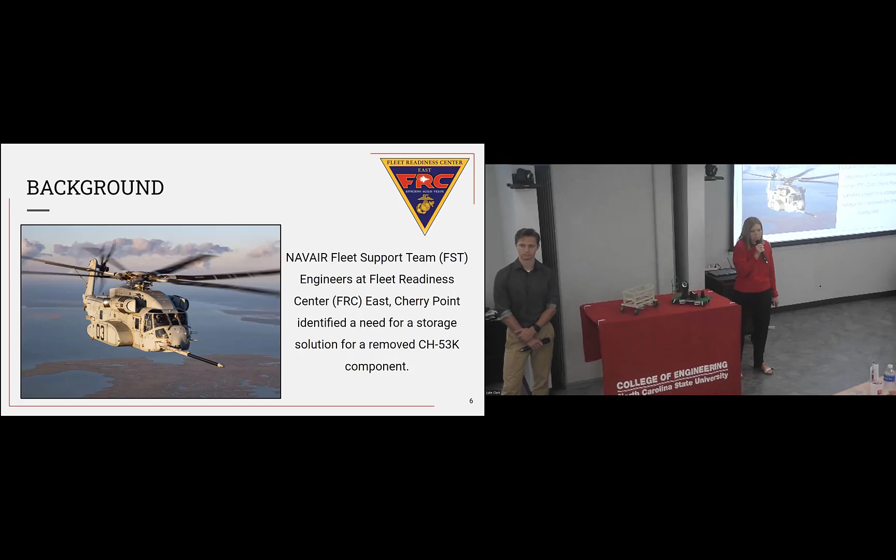If you have any questions or comments, we'll have time at the end to hold an open conversation about that. So jumping in, pictured here is the CH-53K helicopter, which is used by the Marines. And over at FRC East, they have a fleet support team known as the FST, and they support this aircraft and its Marines to keep it up in the air and supporting the mission. Essentially, the engineers from the FST came to us and briefed us with an initial problem, and that was that they had identified a need for a storage solution for a component that comes off of this helicopter.

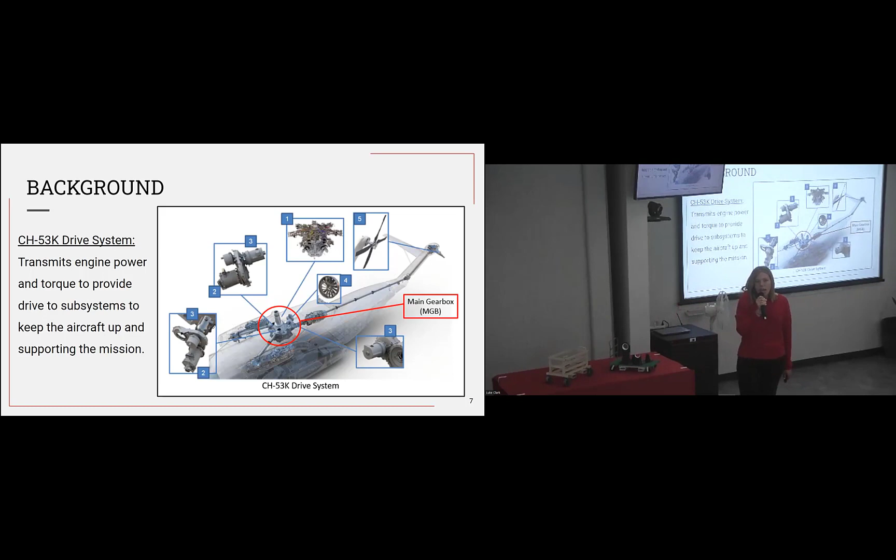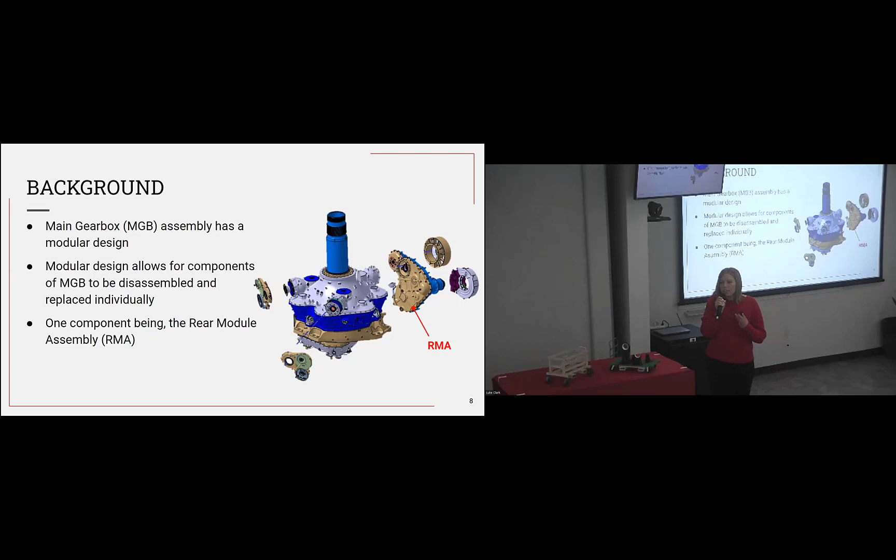Some more background for you. This is an internal view of that 53K and its drive system. Circled in the middle is the main gearbox, and it transmits engine power and torque to several of the subsystems that you see here. And here is a bigger picture of that for you. Sikorsky, who is the original manufacturer of this aircraft, designed this gearbox to be a modular design. With that being said, you can individually disassemble and replace components as necessary. One of those components that can come off individually is known as the rear module assembly, and today you will hear that called the RMA. And that is the component that the FST reached out to us about creating a storage solution for.

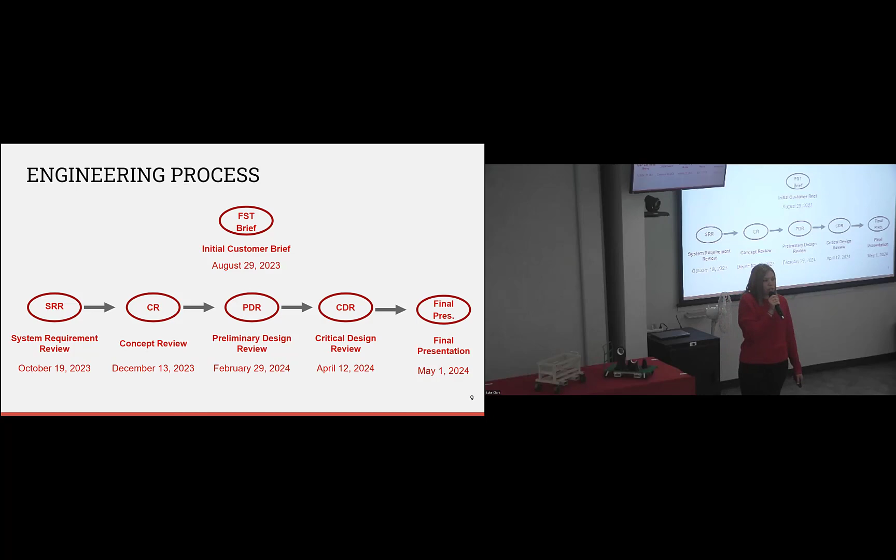So I just gave you a crash course of what we were given by the FST. And upon receiving that information, we began to step through the engineering design process that we've been learning here at the MES program. So we stepped through evaluating the problem, setting some requirements, and moved on to conceptual design, moving on to preliminary design, and arrived at our critical design review where we received engineering approval on our final design. And that final design is what you will be seeing here today. So with that, I'm going to turn it over to Thane, and he's going to finish providing you with details of how we step through this engineering design process.

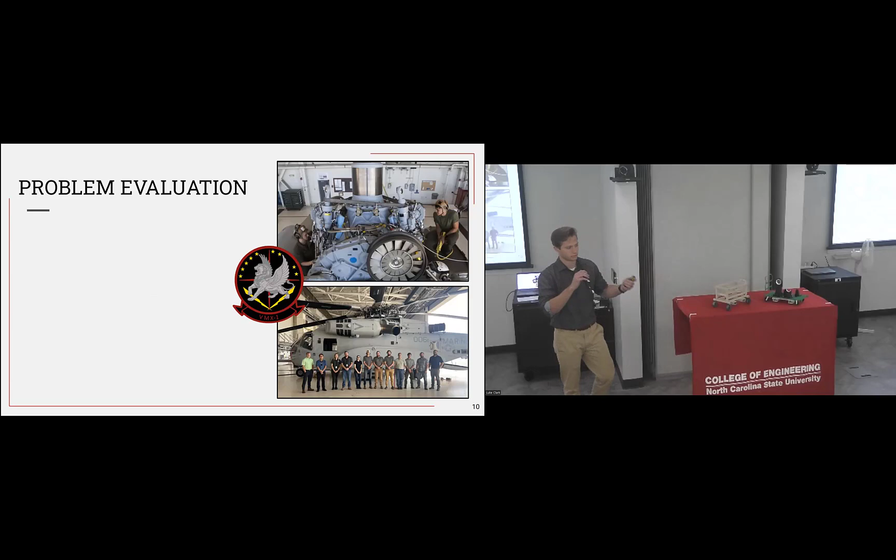Thanks, Savannah. So problem evaluation in engineering is one of the most important parts of the solution process, because if we don't correctly understand a problem, then we're not going to have the most effective solution. So what we try to do here and what we're taught to do here in Havelock is to understand the problem and understand what the problem really is before we jump into how to solve it. So in effort to do that, we were able to visit a squadron down in New River, and we were able to get a look at what the problem is, everything surrounding the problem, the maintainers who would be dealing directly with this problem and who would be affected by our solution.

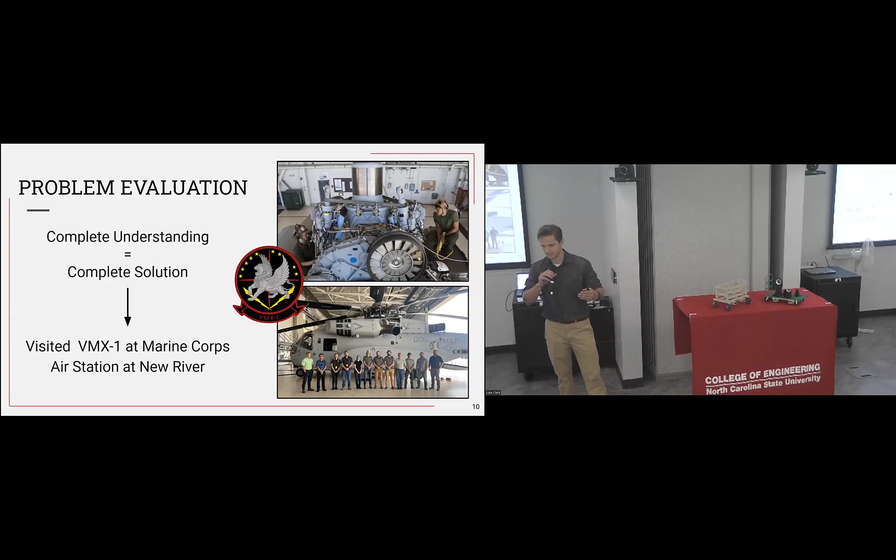So during our visit there, we were able to get a look at this component while it was on the aircraft, and we were able to see that when the RMA is removed from the aircraft, it's done for a couple of reasons, maintenance being one. It reaches certain cycles and it needs to get taken off for repairs or checks. So when that happens, in order to not down the aircraft, they ship a new one in, and they take the old one off and they replace them and keep going. But there's a slight flaw in this process where when the new one comes in, it's in its shipping container. And when they have to pull the old one off, there's nowhere to put the old one. So they do the best they can. They put it at the best place in the hangar, and they replace them.

So the problem really was that this old RMA that needed to get repaired had no place to go and wasn't being protected or in a good, safe spot, so that it wouldn't get damaged or corroded or anything. So with that understanding, we were able to really dig into this problem and better evaluate it than if we didn't go down there and talk to the people who were using it. So we were able to get a list of functions from the maintainers as well as the engineers that would be like the haves and necessities for our solution.

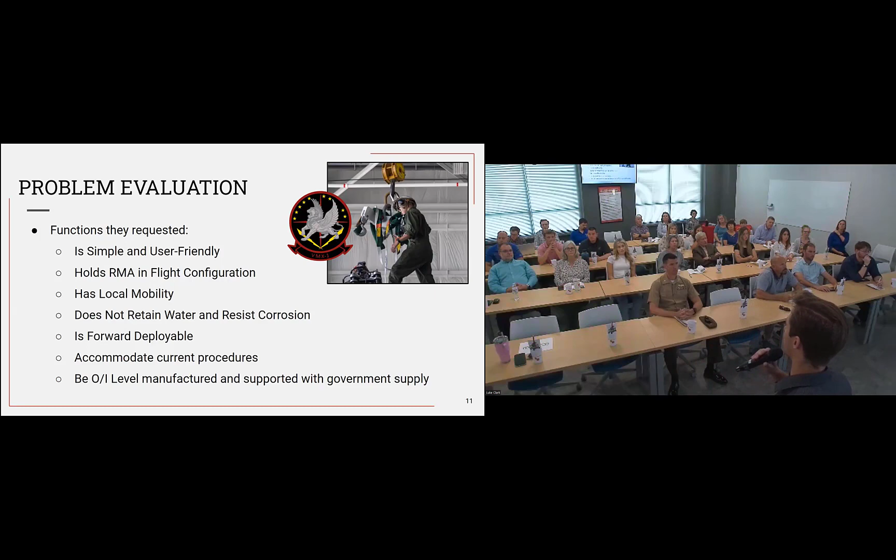Some important ones were that they really emphasized that they wanted it to be simple and user-friendly. They wanted it to be easy to use. They didn't want anything super complicated, just user-friendly. Along with that, down here at the bottom, you can see be O/I level manufactured and supported with government supply.

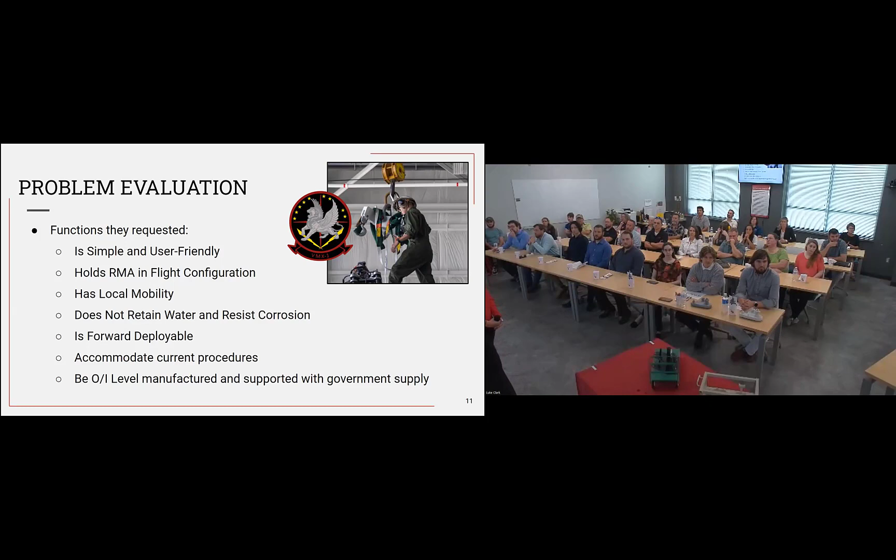So for those of you who don't know, the FRC has 3 levels of maintenance: the depot, the intermediate, and the organizational level. The depot is what we have over here on Cherry Point. They are the high-skilled artisans, and they do the high-level maintenance when they take an aircraft apart and they do all their maintenance on it. The organizational and intermediate levels are located at the squadron in New River, and they do the basic maintenance on some aircraft parts, but nothing really intense.

So this was really the gem of the project, because we had to not only make it simple and easy to use, but simple and easy to make, so that they could make it at any squadron that housed these 53s. So from there, we were able to make what we call a need statement. And that need statement is to engineer and design a solution that can be O/I level manufactured to hold, store, and protect a removed RMA from the CH-53K for up to 28 days. And that 28 days has to do with the preservation procedures to prevent corroding or rust out or anything down there in New River.

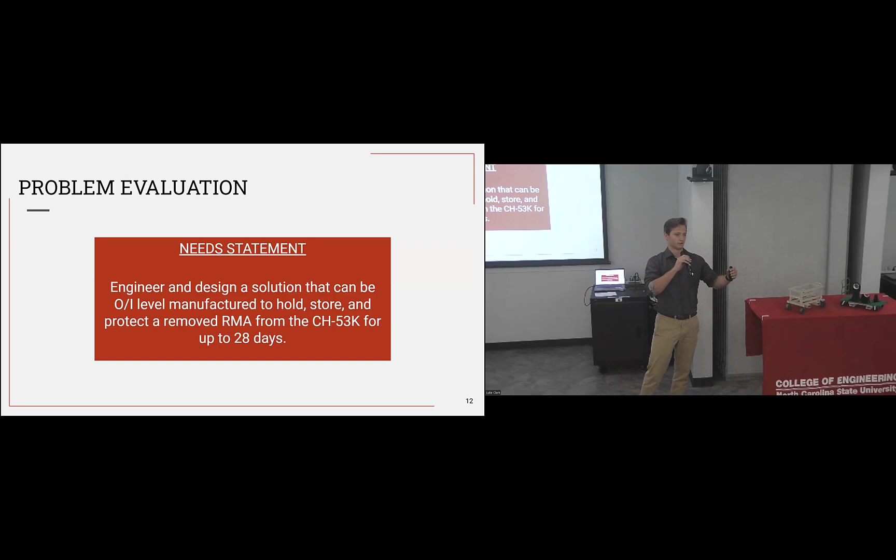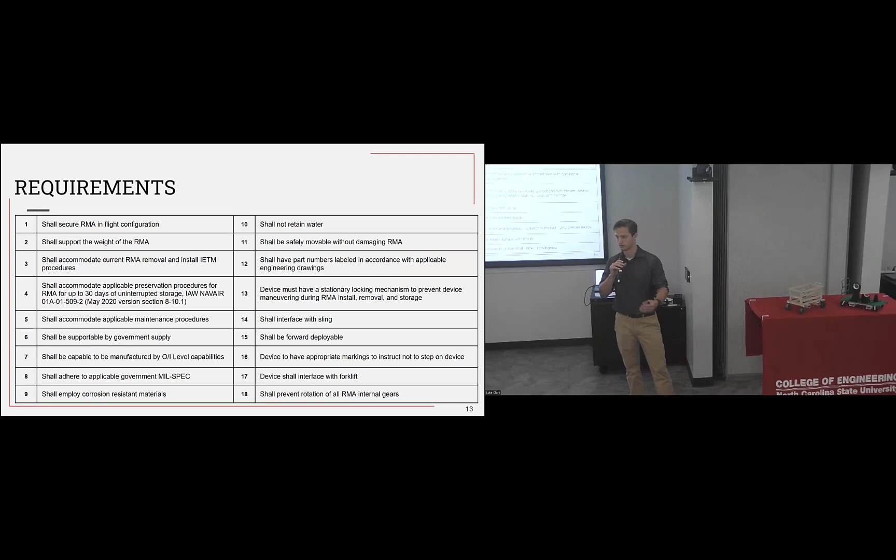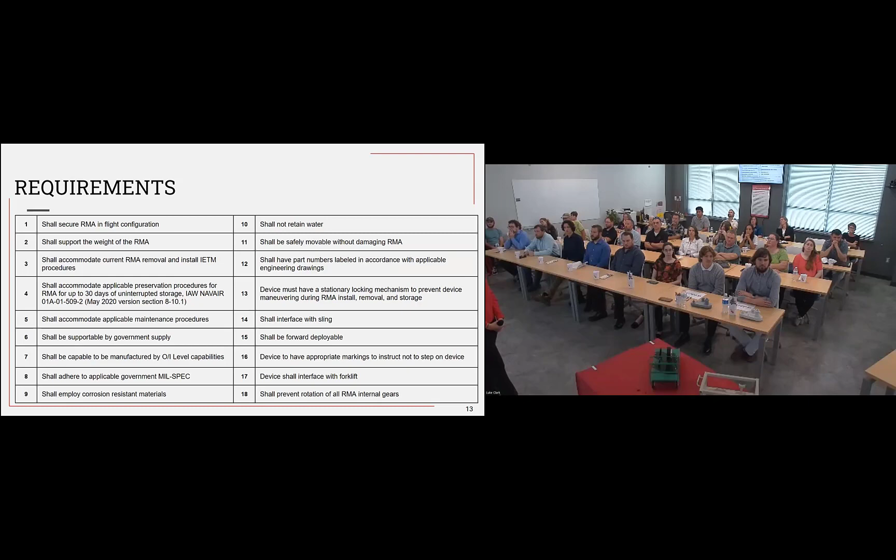From all of this evaluation that our teams went through, we were able to come up with requirements, as Savannah mentioned earlier. And this list of 18 requirements is what our team brought to the engineers and got approved on to move forward with designing to these specifications. So after this process, we then moved into concept design, as Savannah mentioned in the engineering process earlier. And from there, we broke off into 2 teams of 5, and we both approached this project from 2 different aspects, as you'll see. So here you can see an overview of each design, and we're going to have some demos for you real quick up front. And then we're going to go into a brief explanation of how we got from start to finish of each orientation of the design up until now.

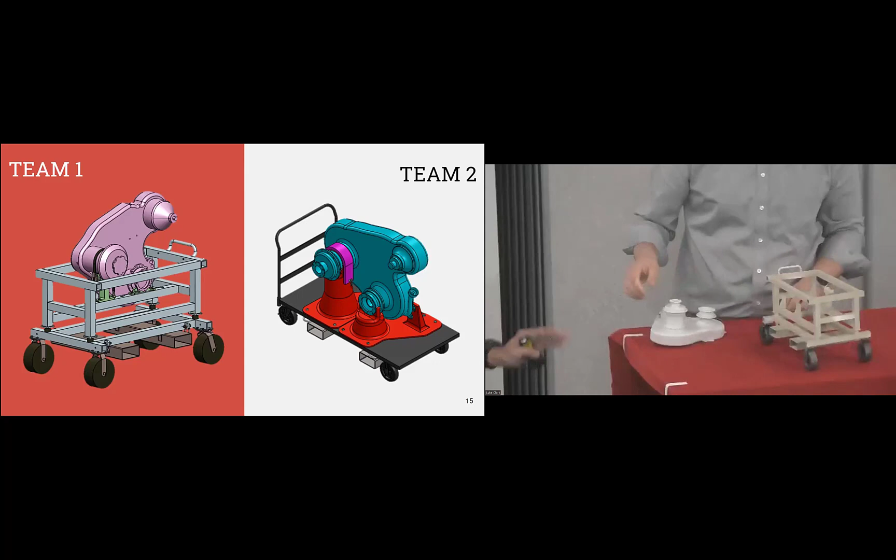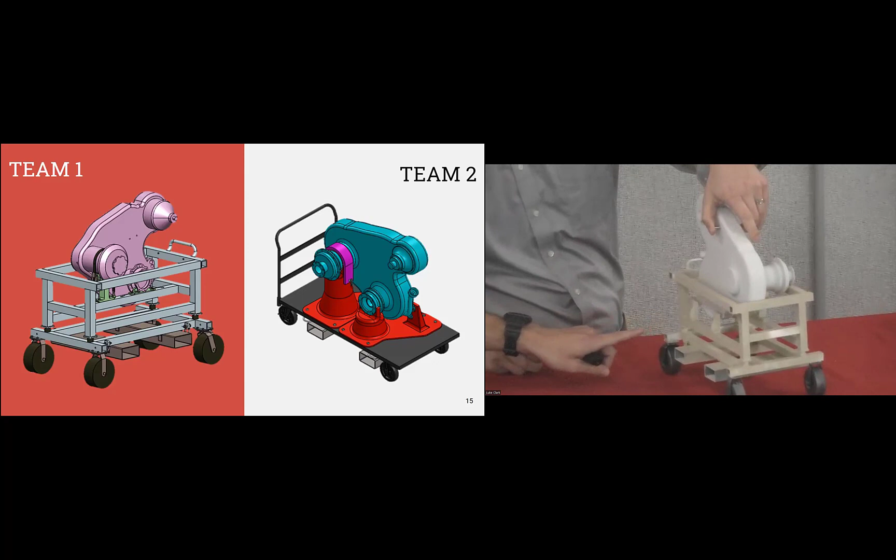So you can see on the big screen here, team 1 is going to go first. So when the RMA is lifted off the aircraft, it is brought over to our cart, or the cart to the RMA. It is then set in to these front cups over here. And then once it is seated there while still on the sling, it is then bolted in the back, and the sling is then released. And on this front support, this front shaft here, there is a strap. It's not shown on the prototype, but we'll show you in the design later. And that's how our design holds and supports the RMA.

Team 2. Thank you. So similar to what the first group was saying, the RMA gets removed from the helicopter via the use of an overhead crane and a sling. They then lower the RMA onto our device and rest it on the black supports that you can see on the screen. A collar mechanism will go over that input shaft and be secured. And then on the back side of our device, we will fasten the RMA to those supports. All right. And feel free at the end to come up and take a closer look at these as well. But now I'm going to turn it over to Team 1 to step through their design process.

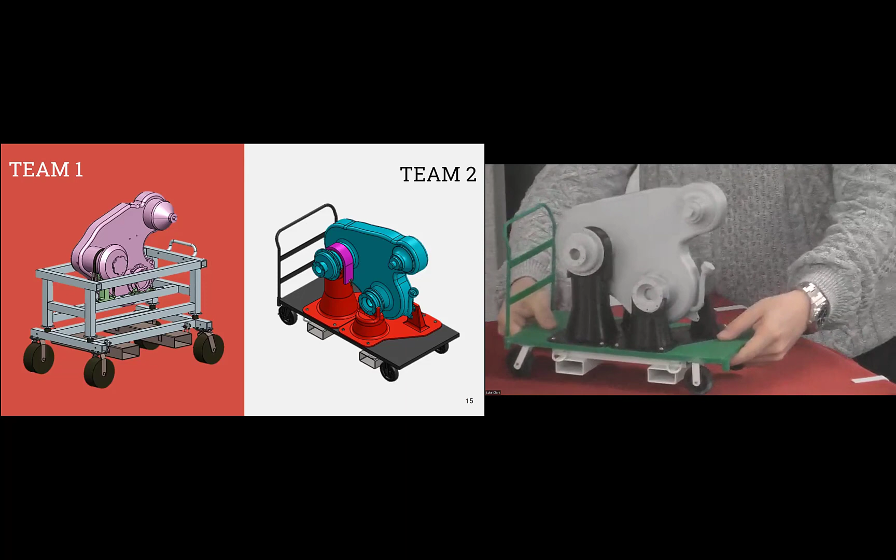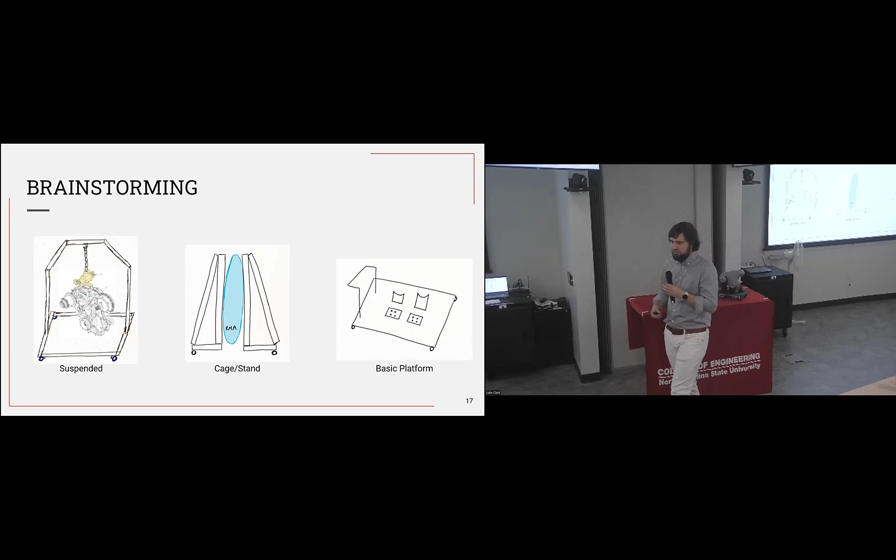All right, thank you, Savannah. Again, my name is Luke Clark, and I'm going to step you through Team 1's design and our design process for this project. So like Thane and Savannah talked about, we analyzed the problem, we defined some requirements, and then our next step was to brainstorm a solution. So each person on the team brainstormed the problem, looking at those requirements, and we came up with 3 basic concepts, as you can see on the screen. We had a suspended style, a cage stand style that could be applied to the RMA and then set down, or like a basic platform or cart.

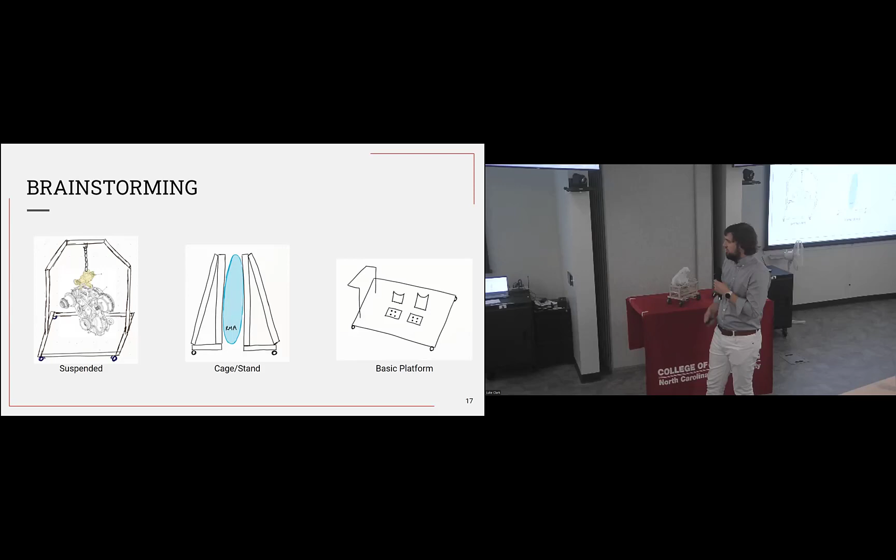So initially we went with the suspended style design, and we chose this because we wanted something that was easy and quick to use, something that was very accessible to the maintainers so that they could still access the RMA, and something with simple interfaces between the RMA and our solution.

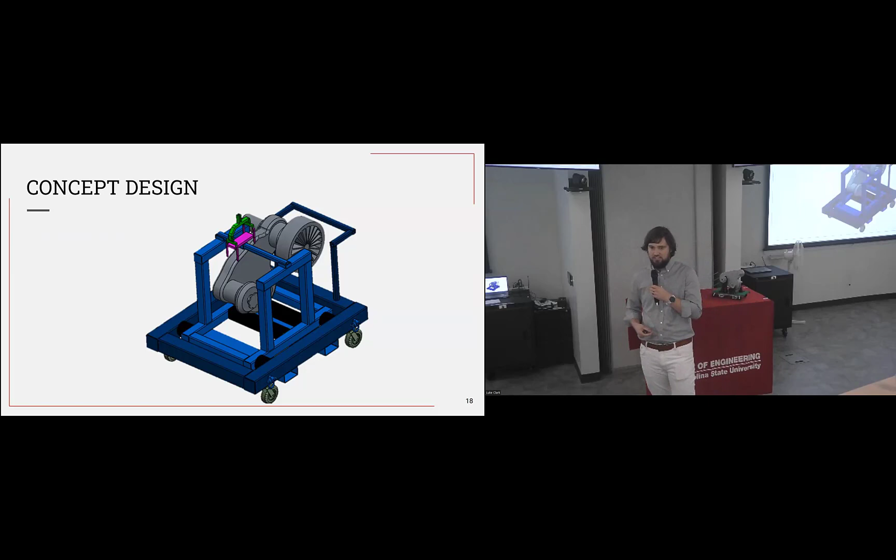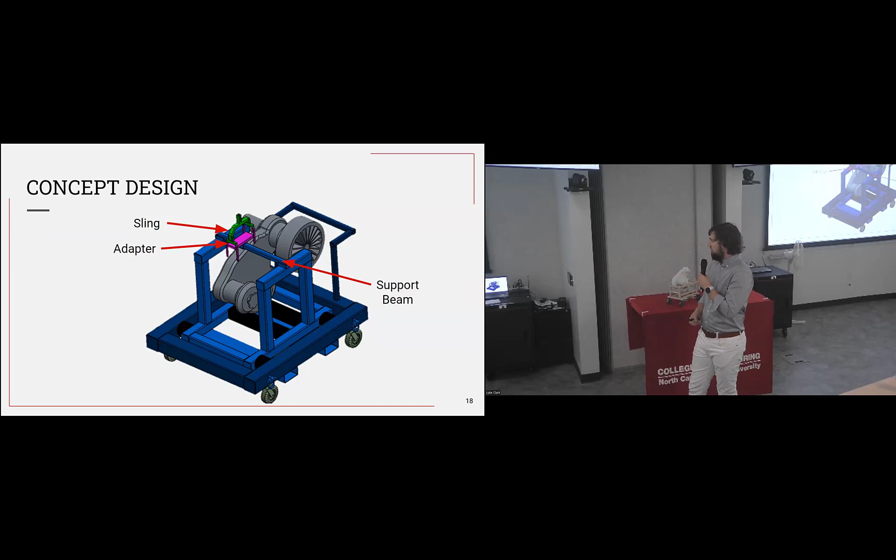So with this, we moved into the concept design phase where we brought this cart design to our customers and we presented this at the concept design review. So like I mentioned, we wanted to have a simple interface. So our idea was to create an adapter that would go between the sling and the RMA, and that adapter is shown in pink. That adapter would then be connected to a support beam, which would then be connected to our cart. So we received approval at the concept design phase, and we continued on into the preliminary design phase.

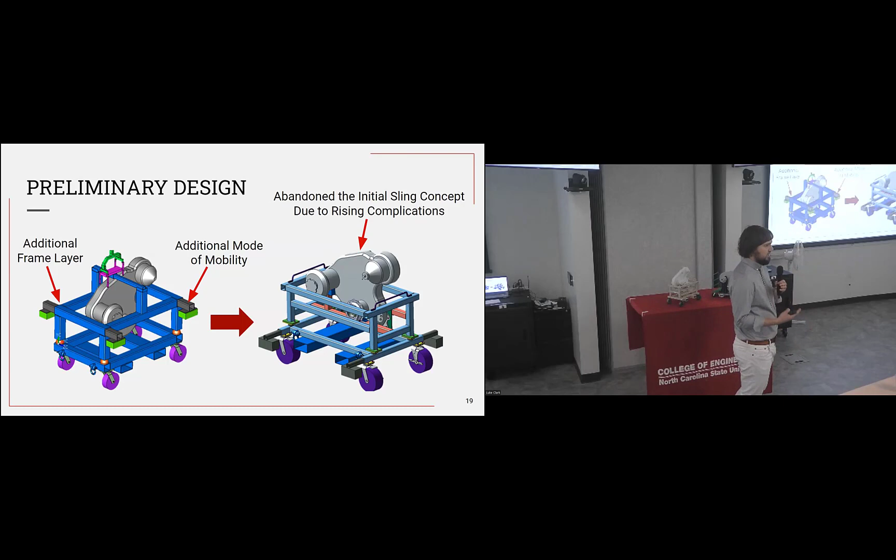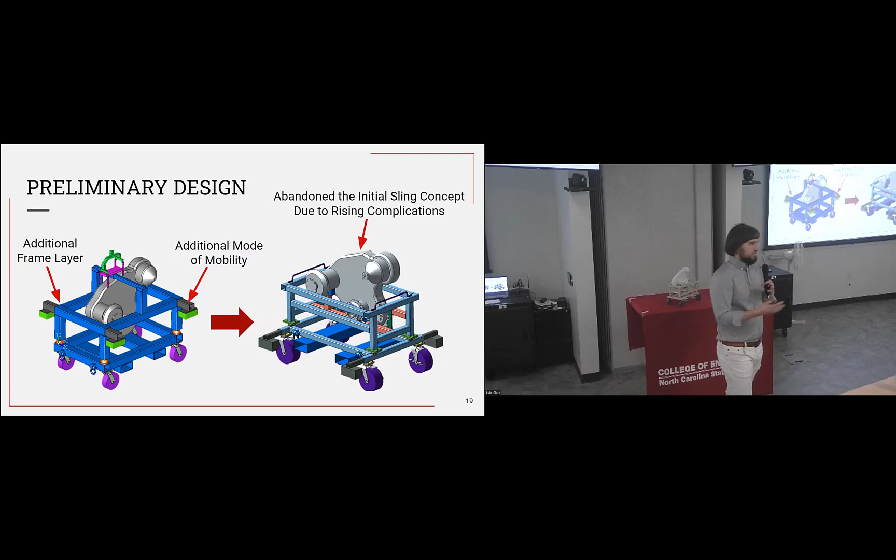And at this point, we added an additional frame layer to our cart, and we also added an additional mode of mobility. As we continued on with this design, we started to find some complications with the suspended style. So we decided to drop that idea, pun intended, and we moved to this cart that you see on the right. So with this cart, we moved into the final design stage, and we got to the final solution, which you see on the table and on the screen.

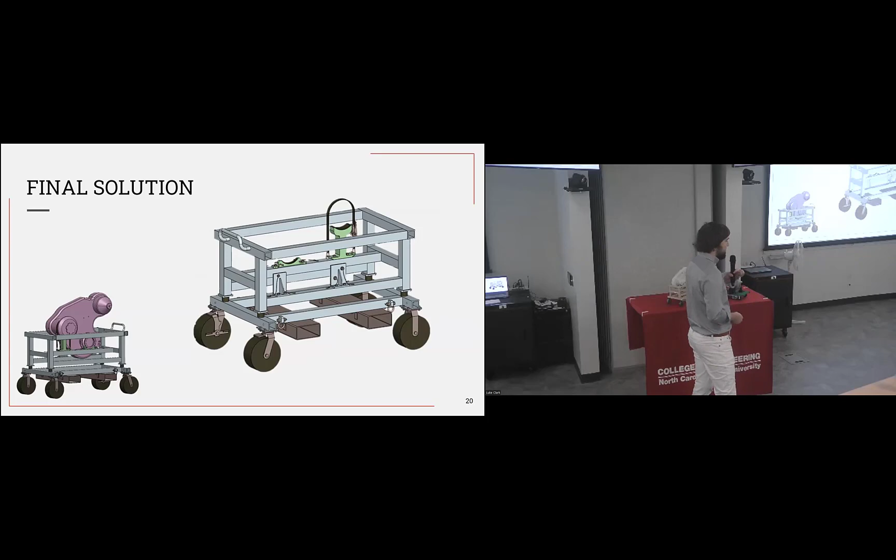So what I want to do is just talk through some of the features of this cart and why we chose it. So we wanted to have something that really protected the RMA. That was the main point of the project, was to protect the RMA while it was off the aircraft. So what we have is this frame that will basically surround the lower part of the RMA and protect it.

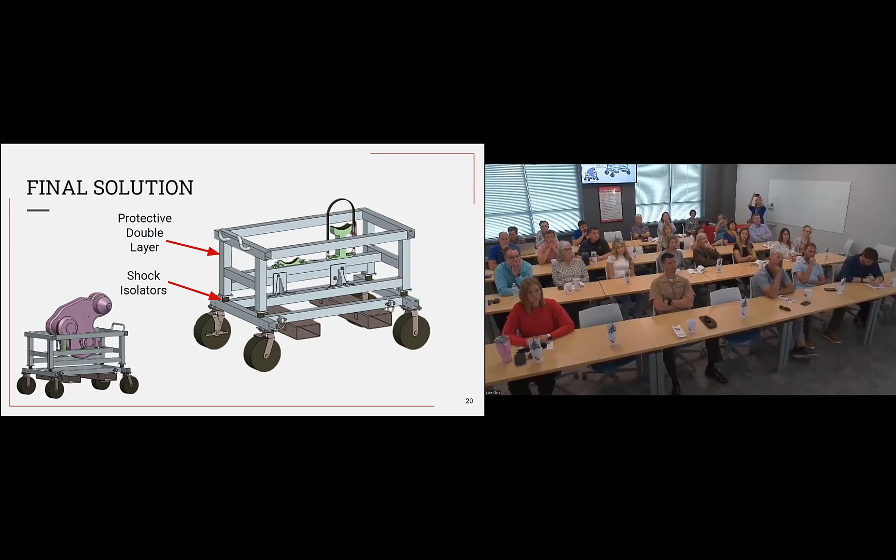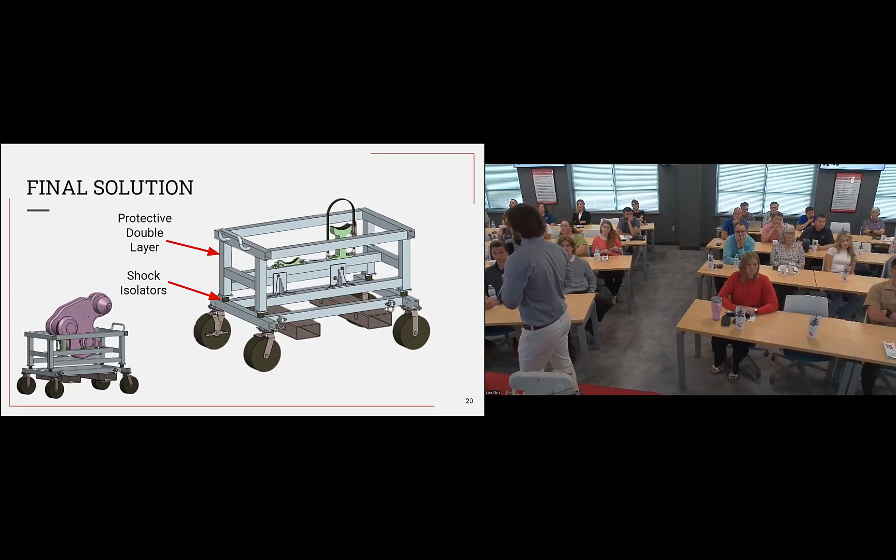And then that frame is attached to the bottom frame by these black things that you see, which are shock isolators. And so what those do is they relieve any sort of vibratory or shock load that our cart may experience while it's being used. And we had to put a lot of design and analysis into those to make sure we had the right sized and right type shock isolators.

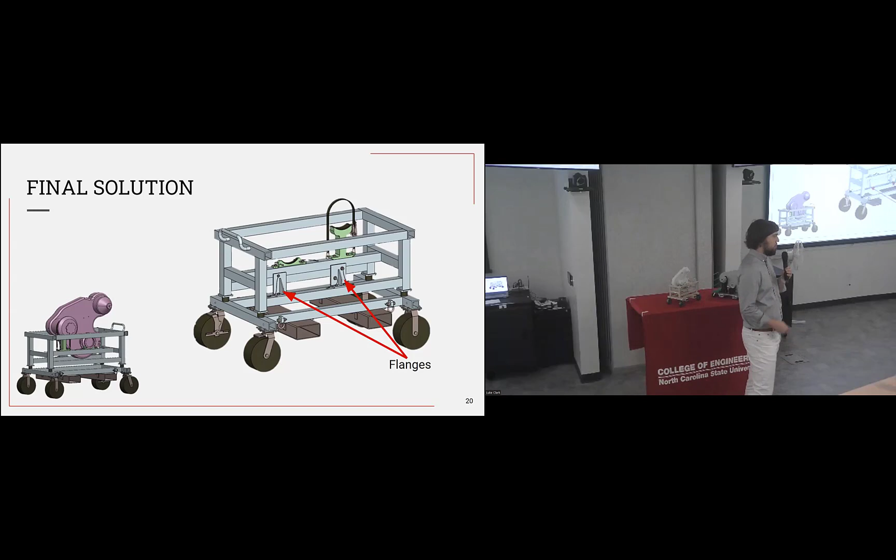The next thing I want to point out is the fork pockets at the bottom. So these enable our cart to be picked up by a forklift and moved a longer distance that you wouldn't want to push with just the handle and the caster wheels. Next up, you see the flanges that Thane pointed out in our demonstration. Those bolt onto the RMA in the same way that the RMA is bolted onto the aircraft. The other supports we have are these cup supports and the strap, which support and secure the RMA on the other side.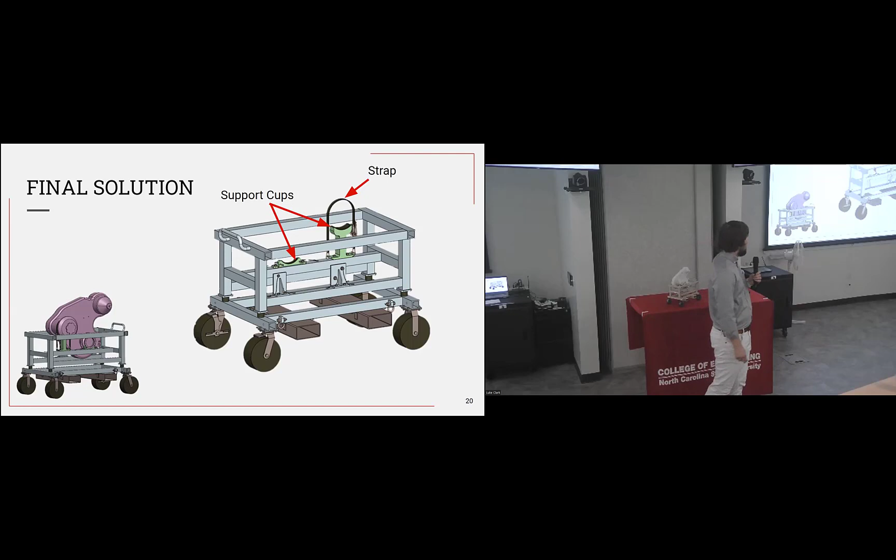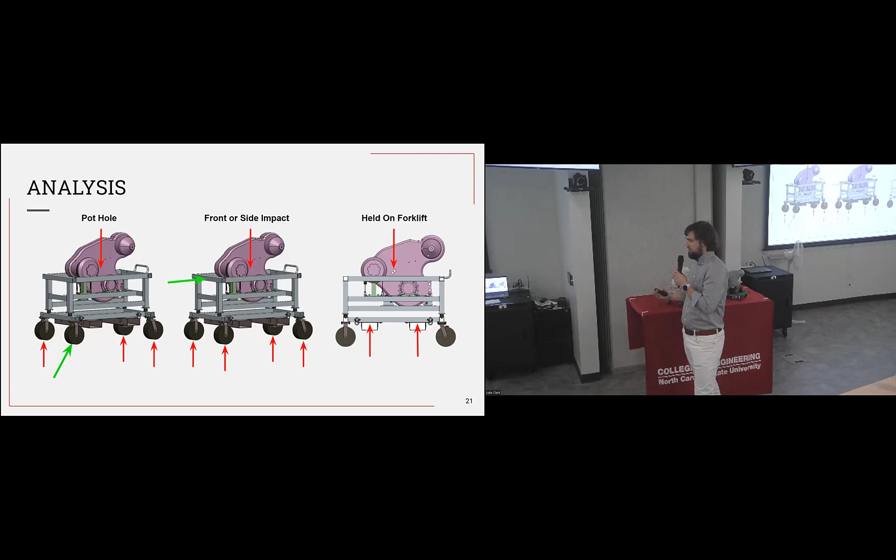So another part of our engineering process was the analysis that we had to put into the cart. So what we did is we started by thinking about what sort of things could our cart experience while it's being used. So it could hit a pothole, it could hit a bump while it's being pushed. It could have a front or a side impact, whether that be our cart hitting something or something else hitting our cart. We thought about our cart on the forklift and whether those beams on the bottom are strong enough. We looked at what it would take to tip our cart over in motion or just standing.

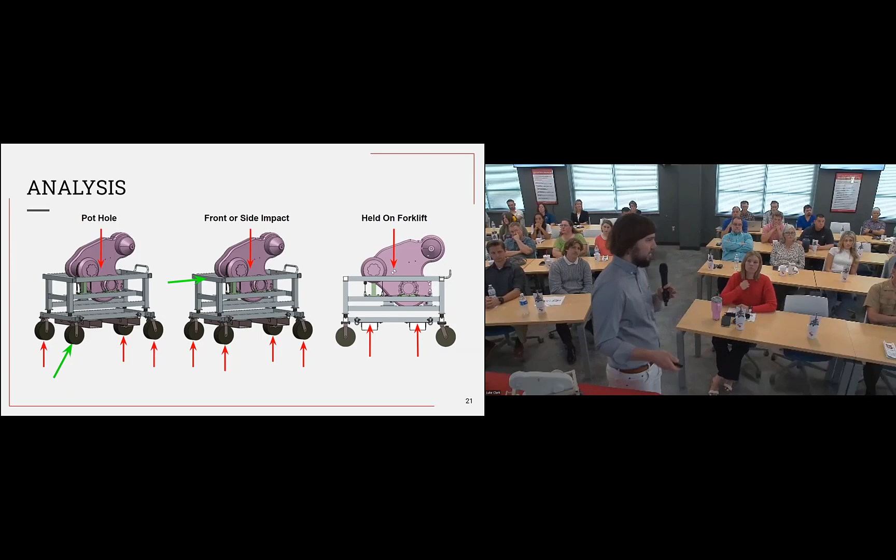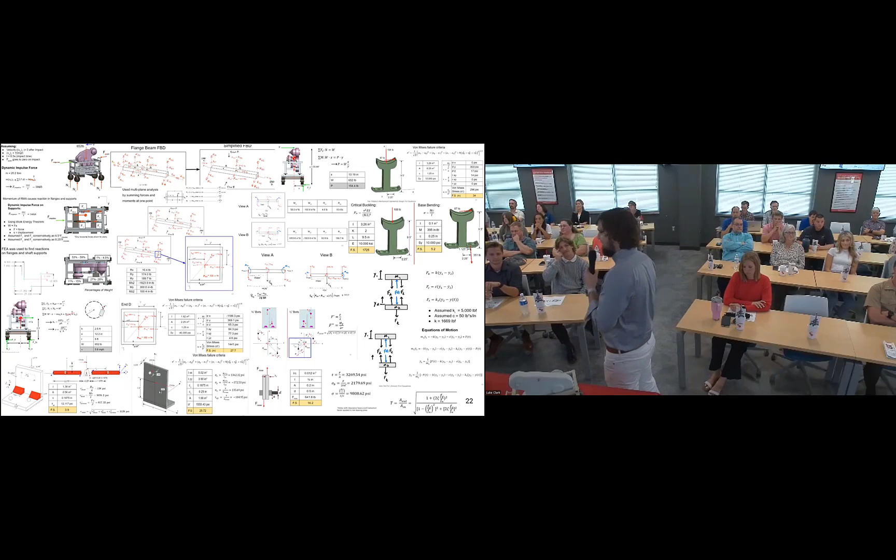And so once we identified these cases, we started to analyze them. And we didn't have time to analyze all of them, but even with just the few that we chose, we had quite a few calculations to go through. So this is what we presented to the engineers at the critical design phase. And this was about half the calculations we did. These were like the critical cases. So that's what we did. We're not going to go into the details of these, but this is what we did to analyze our cart and make sure it was strong enough to hold the RMA and protect it from forces.

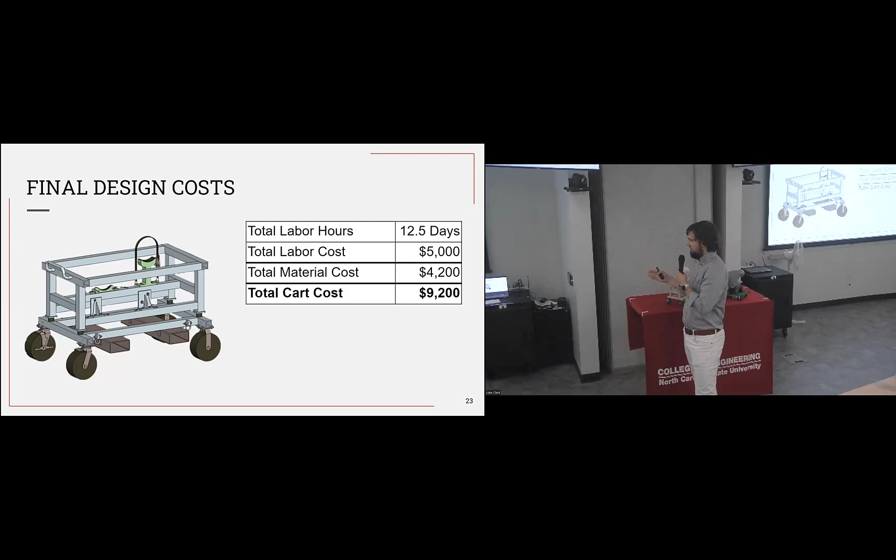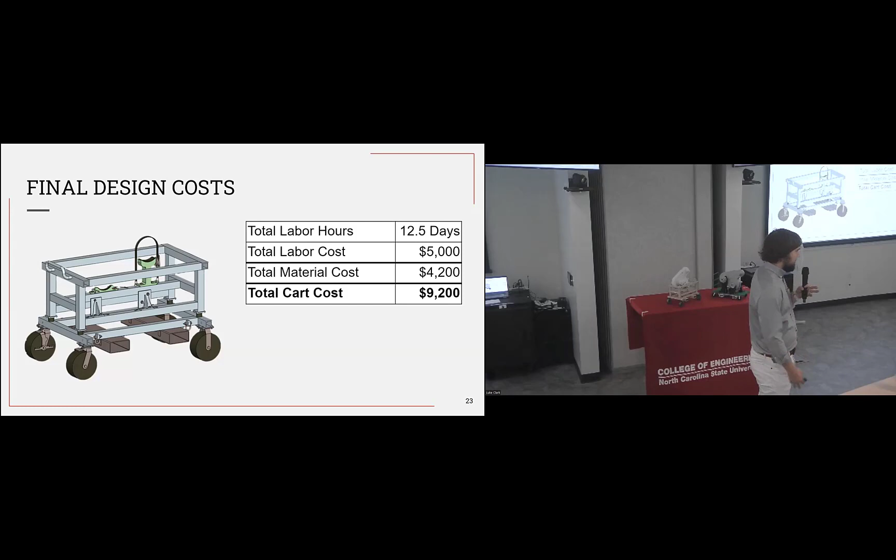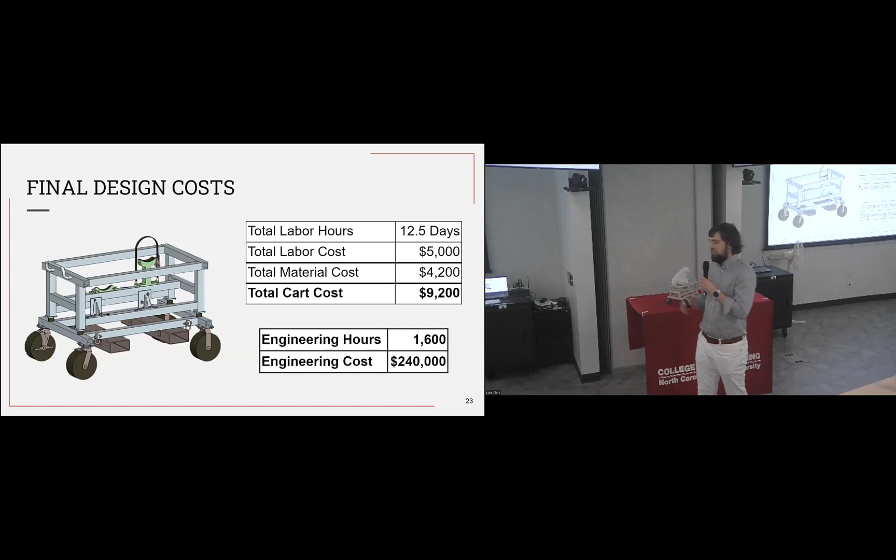So now this is just a brief cost overview. So we have labor and cost that we estimated. We estimated that for one person to build this cart, it would take them about 12.5 days, start to finish, which would be about $5,000. And then we estimated that the material cost would be about $4,200 for a total cost of $9,200. This next part may or may not surprise you, but we also estimated that our total time for 5 people over the year that we worked on this was 1,600 hours for a total of $240,000.

But we're in a promotional period right now. Student discount. It's going to be $0, one time only.

So with that, I'm going to let Team 2 go over their design. And please take note of any questions you have. We will answer those at the end. Thank you, Luke. As he said, I'm going to go through the same exact process that Team 1 just did, but for Team 2, obviously.

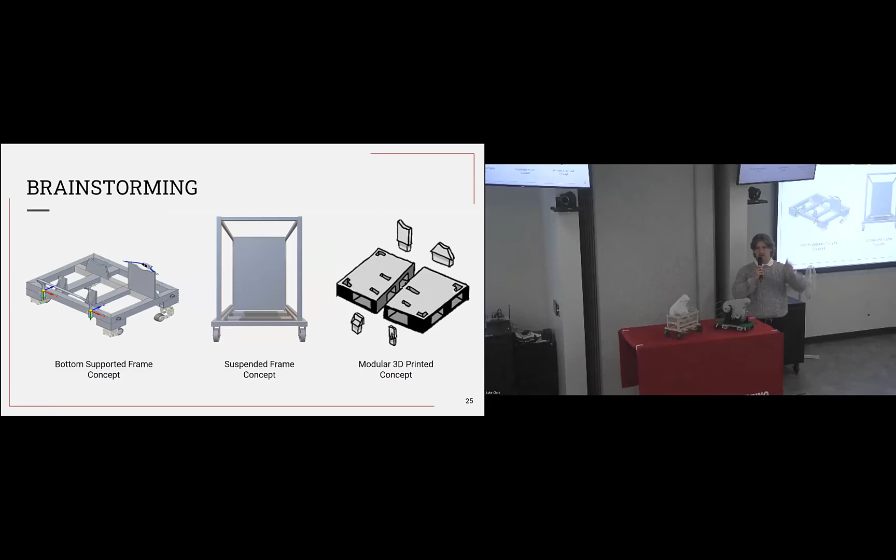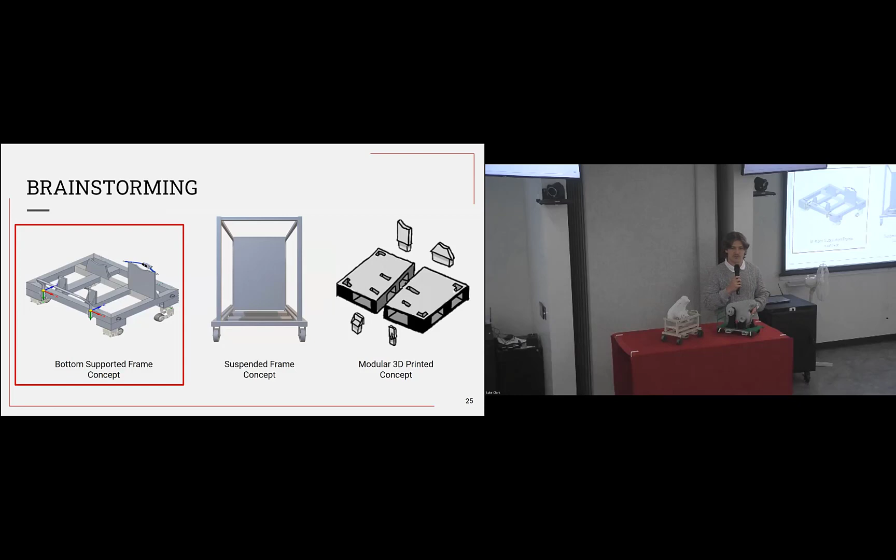So starting off, we started off in the same brainstorming stage. We looked at a bottom supported frame concept, the same suspended frame that they mentioned as well, and also a modular 3D printed concept. So remember this because we end up circling back around to this, but initially we decided to go with the bottom supported frame. It seems simple to make, simple to use. So that's where we wanted to go with initially.

So arriving at our first design review with the engineers, this is what we presented. This is a welded frame with these aluminum supports that you see sticking up. We use shock absorbing casters in order to mitigate any of those vibrations that Luke mentioned before. Additionally, we had these quick release pins in each of the corners that allowed our cart to become very compact.

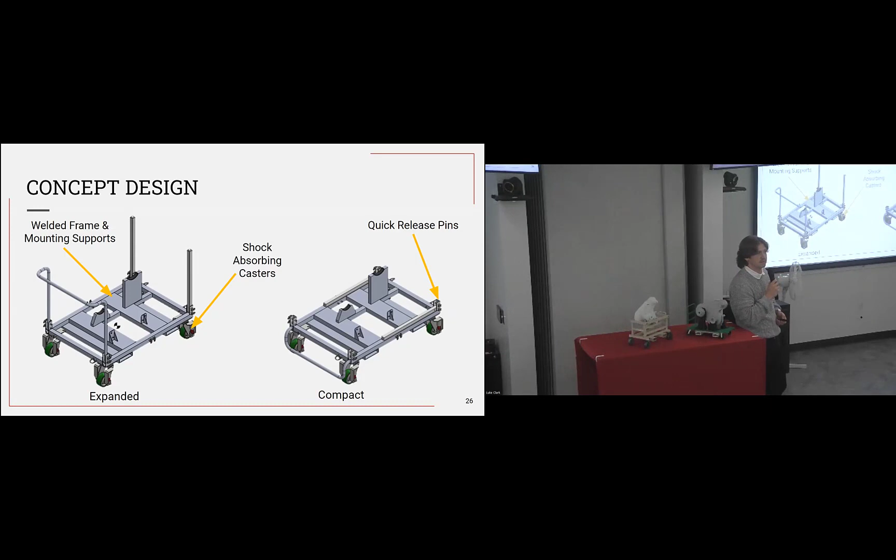So here you can start to see the idea behind Team 2's concept, which is efficiency. We really wanted it to be easy to use, easy to make, and it's not going to be in the way when it's not being used. So we really wanted to emphasize the simplicity here from the very beginning. And as we moved on, we wanted to continue this idea.

Like I said, we wanted to reduce the complexity. We wanted to reduce the labor hours. We don't want these Marines having to spend more time building our cart than they are doing the actual maintenance on the items. We also want to reduce the overall footprint. So we want this to be small, efficient, cost-effective, et cetera.

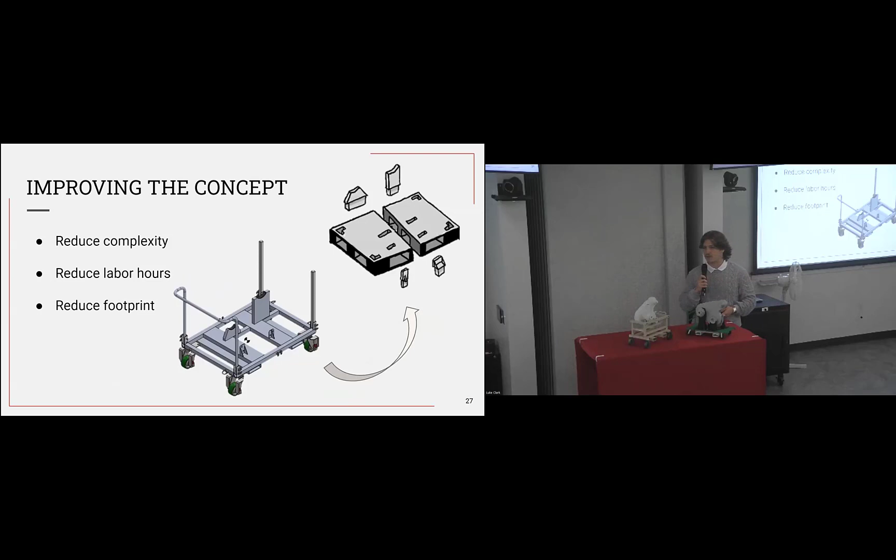So moving forward, the way we did that, like I said before, is we actually revisited the idea of using 3D printed structure, which may sound crazy. The idea of using plastic to support something that is upwards of 400 pounds, which is how much this would weigh at full scale.

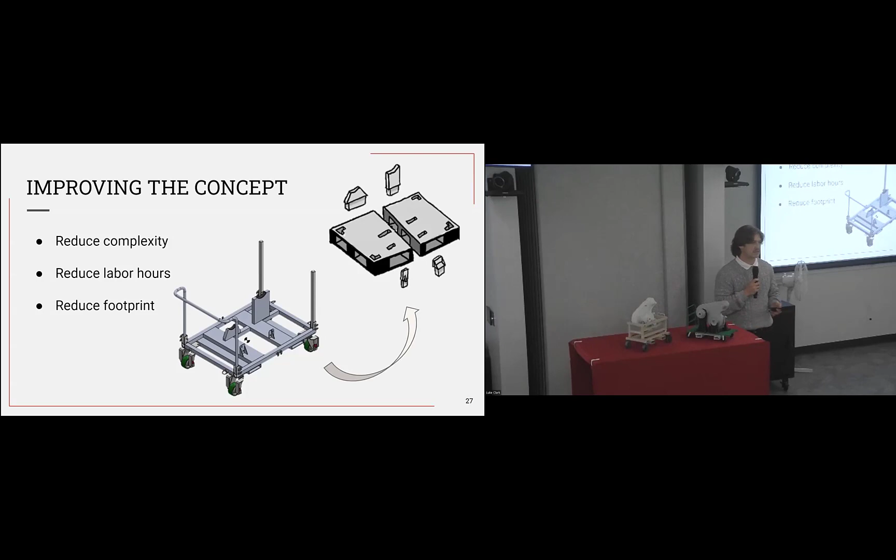What we needed to do in order to validate if this was even possible or not was, for one, we needed to determine, is it possible for each of these sites around the world to print this at all? And we figured that out by discovery of the Stratasys F900. This is an industrial-sized 3D printer, and there is, in fact, at least one located at every single site around the world. The next thing we need to determine is there a material out there strong enough to support the 400 pounds that I just mentioned?

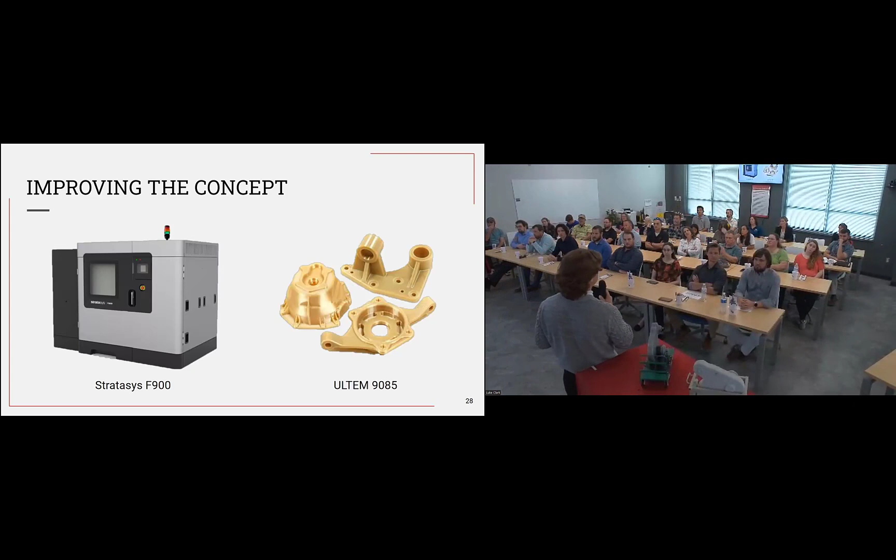And that is where we made our second critical discovery, which is Ultem 9085. This is an FAA-approved, government-approved thermoplastic that is incredibly strong. So now we knew they can print these logistically, and they have a material that's capable in theory. So as we move forward, we looked in any way possible that we could transfer anything that had to be welded, bolted, et cetera, to a 3D printed part.

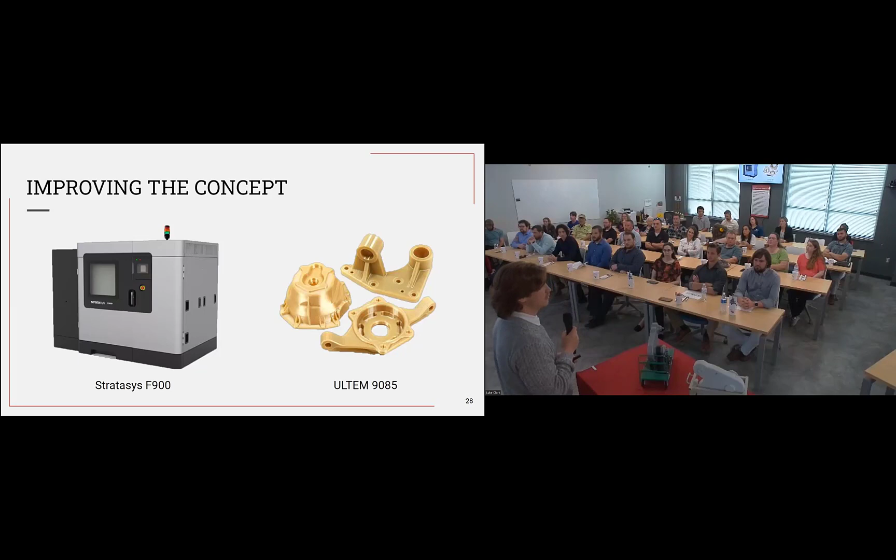So what can we streamline with this design to make it basically printable? So at the end of the day, the dream was to hit a button, and when it's done, your design is done. It doesn't require much labor. So this is where we arrived at our preliminary design.

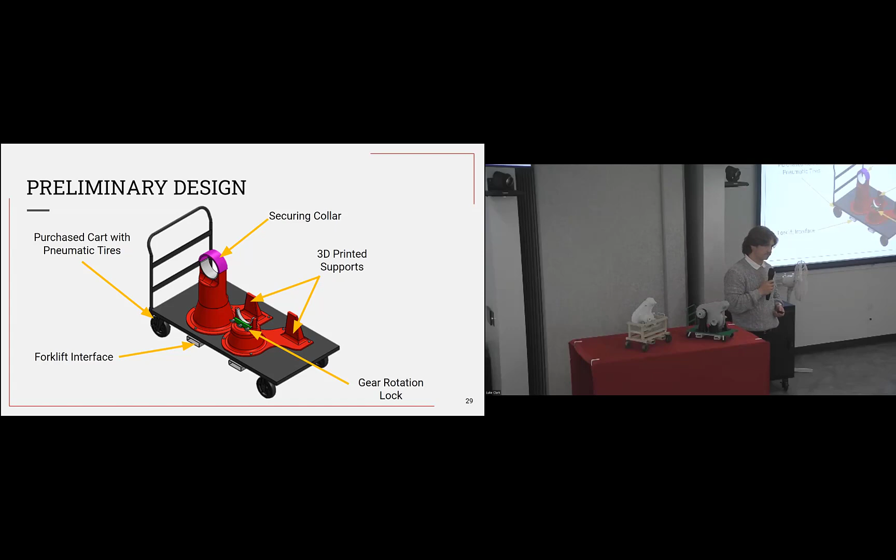So as we moved towards our final design, there were really a few things we needed to polish up and change as we moved forward, figuring out what's strong enough, what isn't. One of them being the collar that you can see at the top there in pink. We wrapped it all the way around the side so that you could properly bolt it into the structure.

The other being the gear rotation lock that I briefly mentioned. So we determined that the weight of the RMA itself actually mitigates the need for this. So we figured out even more ways to simplify the design. There was no need for this, so we removed it entirely.

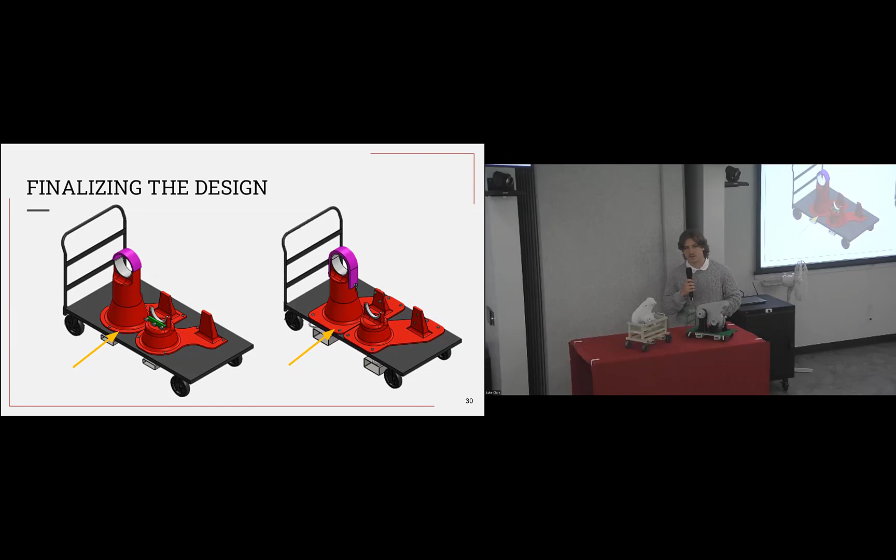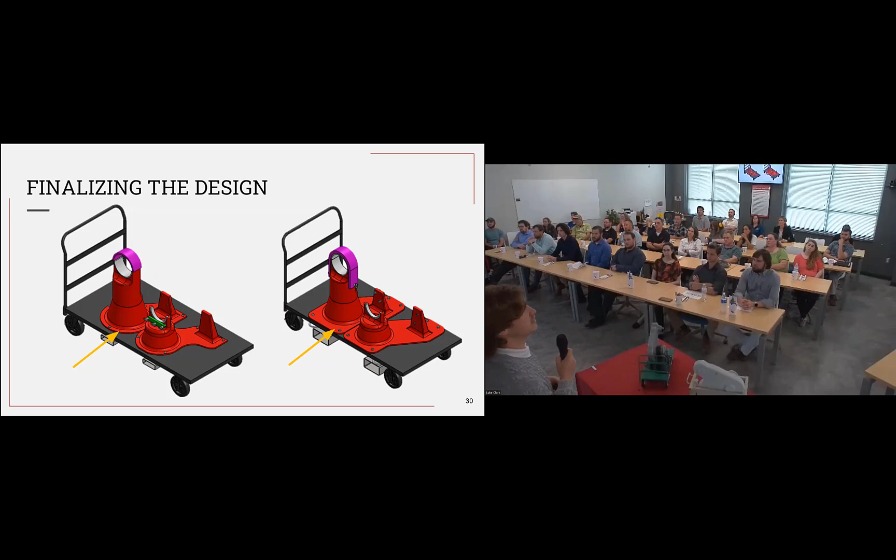Another change being the base of the 3D printed structure. So we redesigned this in order to make it easier to use. So you can see those little bolt holes, very small on the presentation. We moved those out to the edge of the cart. So once again, we're thinking about how easy this thing is going to be to use. You don't want to reach all the way underneath the middle of the cart just to turn a little bolt. That'd be a nightmare. So just through the whole process, we're thinking about how we can make it easy to use, how we can make it easy to make.

Here are the forklift pockets. You can see they changed shape. Once again, we wanted to accommodate for all the different types of forklifts. We want every site around the world to be able to use this seamlessly. And here you can see our final design.

So the last thing you might notice on this slide is that the one on the right does not have a cart at all. The reason for this being that we identified the instance that they cannot get this purchased cart: it's either in backlog, they can't get it, it's damaged. We also analyzed our system and determined that it can be used without the cart. So realistically, if you have the bolts you need, you can hit print on the 3D printer. And when the print is done, you will be able to take the RMA off, set it on there and walk away, which was really the dream from the beginning of the project for Team 2.

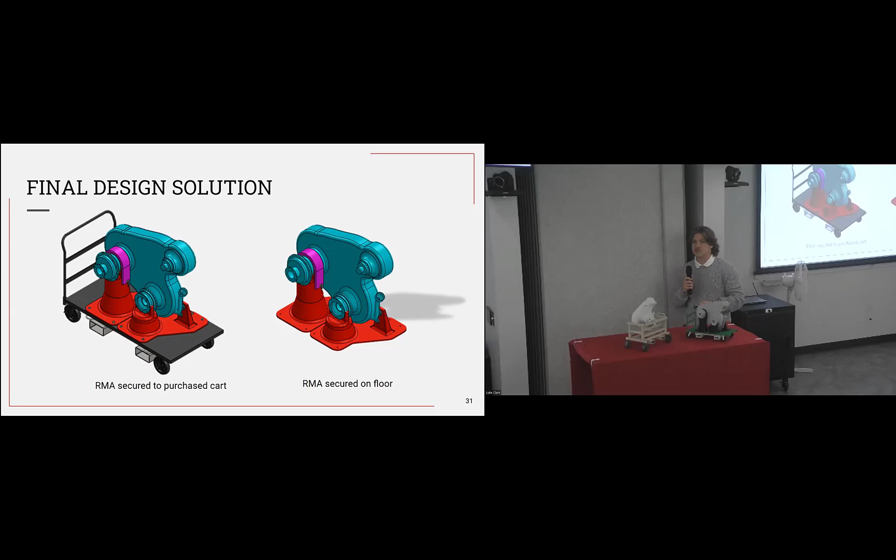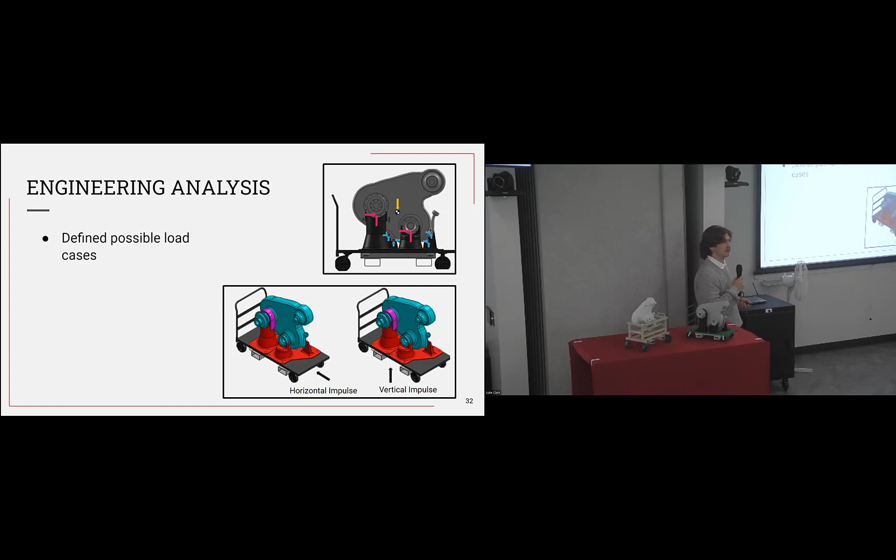So the same way that Team 1 did, we had to make sure that this was actually going to hold it, that this isn't just a dream, that plastic can actually do something like this. So we identified the same possible load cases that they did. So what can happen to our cart when it's being used, when it's being loaded, whatever can happen out there. So we then narrowed it down to some of the more critical load cases. And then we analyzed a few of those for the scope of the project: front impact, top impact, and what happens if this thing tries to tip over, someone's leaning on it, et cetera.

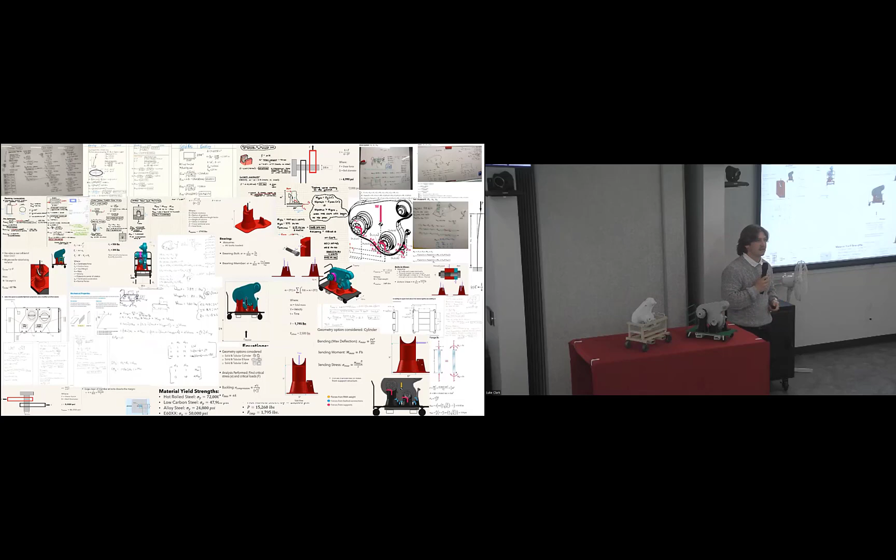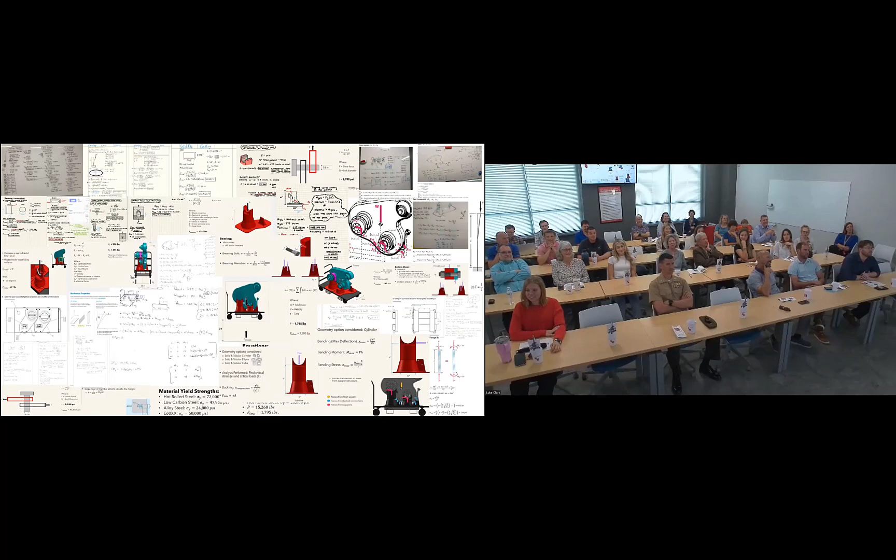So here you can see the calculations that Team 2 presented to the engineers at our critical design phase. We actually are going to start going through all of these right now. No, just kidding. But yeah, it took a lot of math, especially when in the back of your head, you're thinking about big plastic pieces holding something very, very heavy.

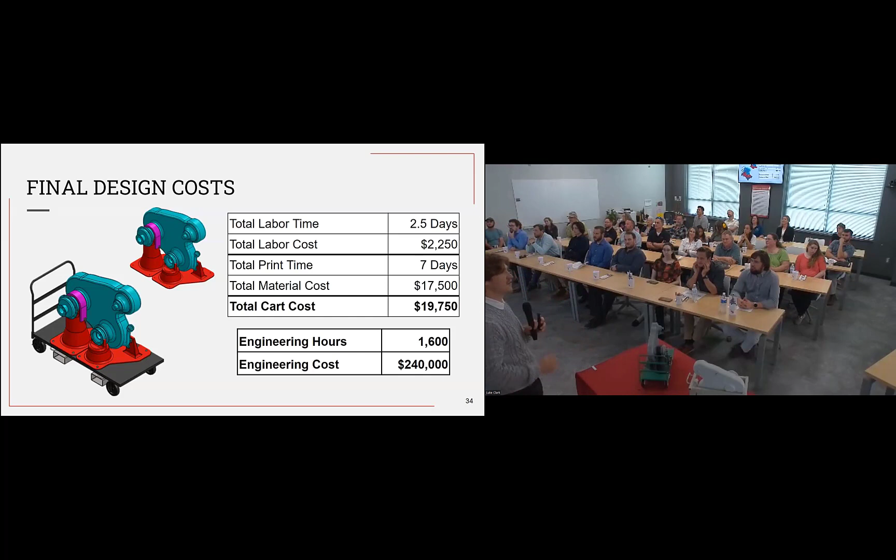But moving on, looking at the final design cost for our team, we determined that the total labor time would only be around 2.5 days at $2,250. This is coming from the fact that you still need to add these forklift pockets to the bottom of the cart. But the majority of your manufacturing is coming from the bed of the 3D printer, which takes a print time of about 7 days and $17,500. Very special materials come with a very special price. And then we also estimated engineering hours working on this project of about 1,600 hours, or $240,000 in engineering cost.

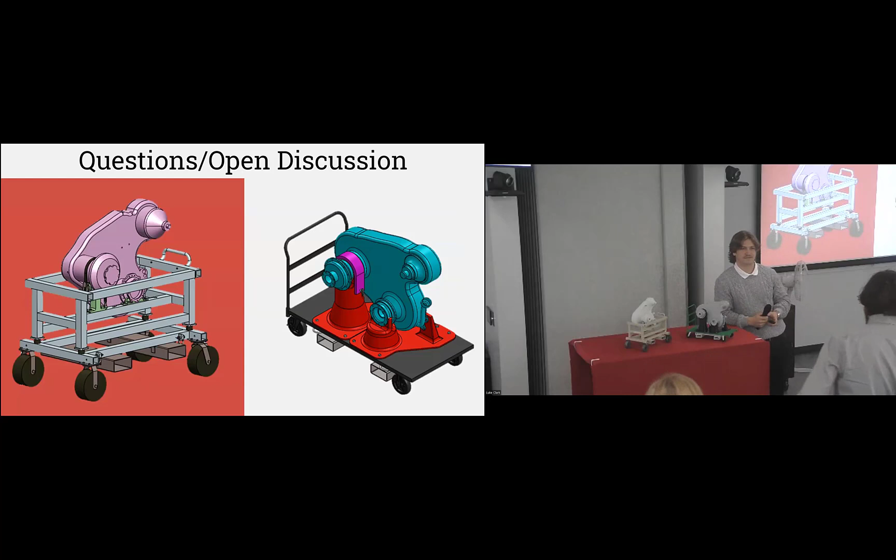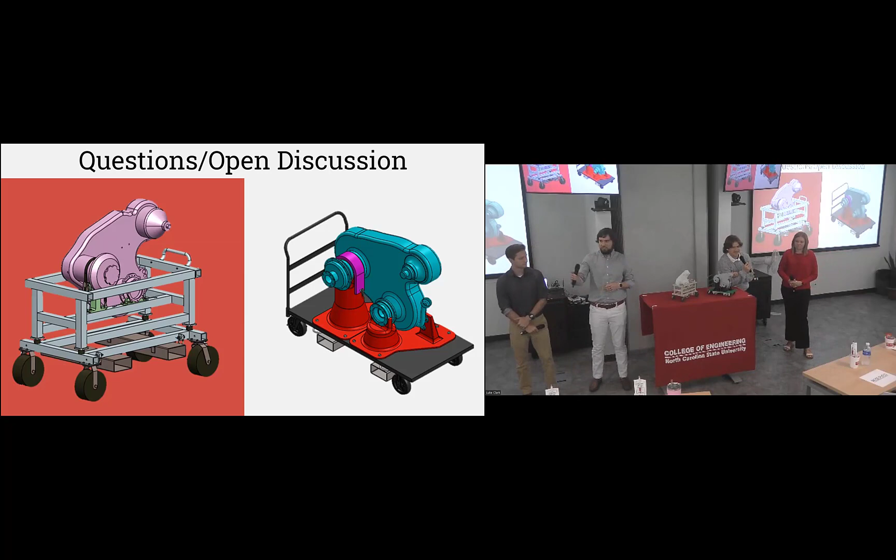So you said that one of the goals was to protect against corrosion. So how did either of these designs address the corrosion protection issue?

So as we worked through a lot of those different stages, a big part of it was continuously going back to the fleet and really figuring out what exactly they needed. So the corrosion resistance was something that was brought to us initially. That's something that they thought, like, we should probably get this. We need to cover this thing up and protect it. But as we worked further and further through the project, we really found out this thing needs to come off and they need it to be sitting safe, relatively, inside the hangar. So we really worked through the requirements and kept ironing them out. And we figured out what was necessary and what wasn't necessary in the end.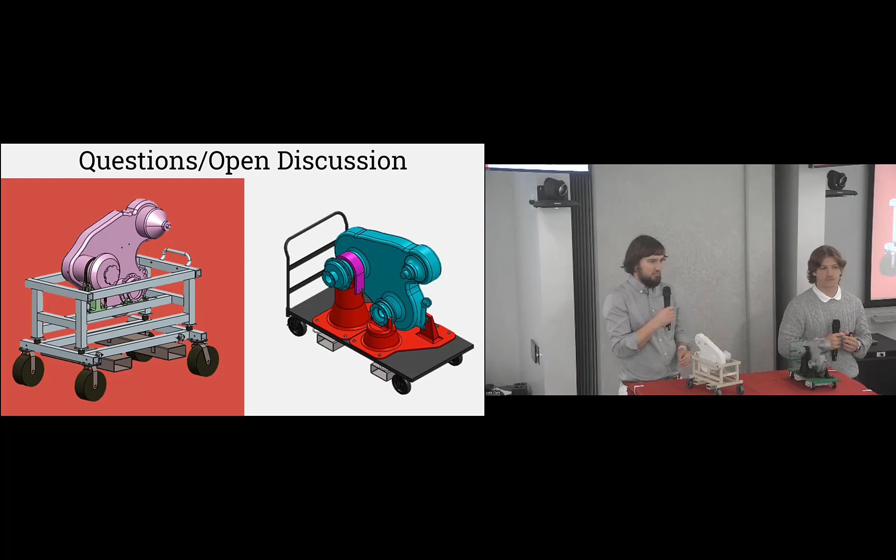Sure, we can go with ours. I'll turn this cart here. The center of gravity of this component, we didn't have the exact location of it, but we did have the sling going on there and it lifts up straight. So we assumed a center of gravity of this component and we located the outer wheels appropriately so that you would have to push this cart substantially before it's going to tip over. Does that answer your question or was there another aspect? Did you all want to talk about that as well?

Yeah, so one of the aspects that I didn't speak about is when we redesigned the red base that you see there, so that it perfectly lines up with the edges of the cart. That is so they literally can't install it incorrectly on the cart. What that did was ensure that our center of gravity, basically where the weight is acting directly down the middle of the cart, will always be right in the middle. So that we know exactly how much force every single time it would take to tip over. And like Luke said, we determined very high values for these safe values.

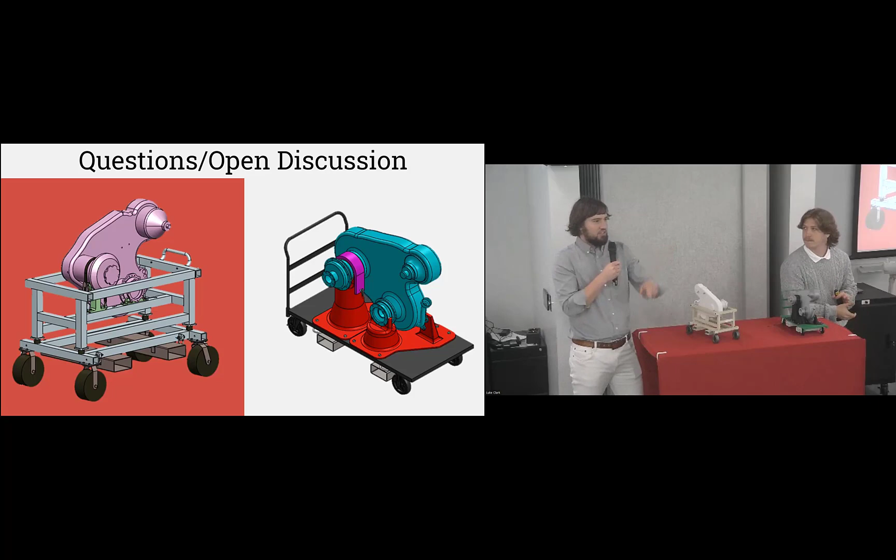Did we have another question on the back row? Yeah, so I had a very similar question, in that obviously it's a very odd shape. So how did you determine what the proper support points were? That's a great question. Thane, do you want to answer that?

Yeah, so it was interesting because as you saw, team one wanted to do a hanging style first, but unfortunately, because this aircraft is newer, we were unable to obtain a lot of information because we were unable to obtain the drawings for it. So a lot of this was, okay, there we go, sorry. A lot of this was us having to do everything we could with the drawings we were provided.

You're good. Okay. So we use these four supports because, I think Andrew mentioned earlier, the current shipping container that they ship the new and the old ones back and forth with uses these mount points. So they use the two front supports here for the input and output shafts, and they use the two flanges. And the flanges are also how it's connected on the aircraft.

So we proved that the materials we chose could hold it, but we knew that the RMA itself would be okay because that's how it's currently supported in other orientations. Does that answer your question? Thank you. Thank you.

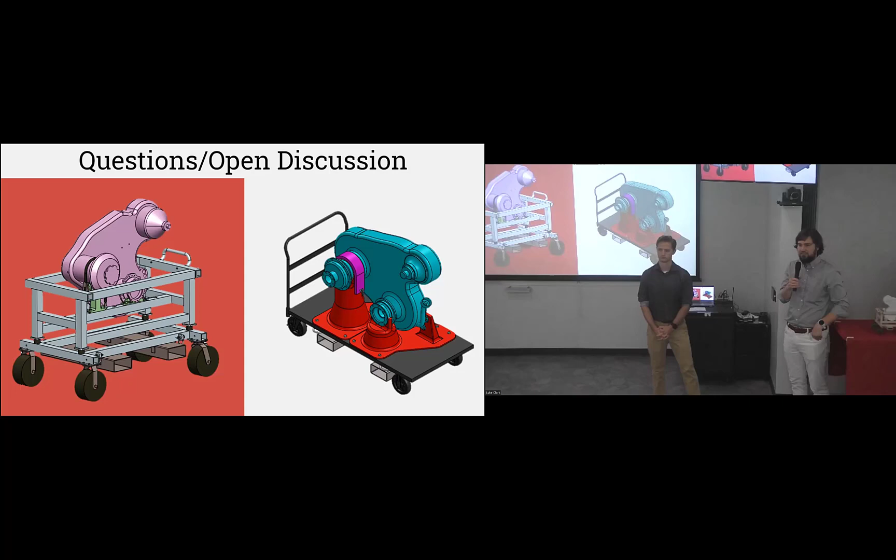Question in the back? So you stated in the beginning that you received a new RMA in the shipping containers. Was there no thought process, just put the old one back in there, or can you help me through the thought process on that? Yeah, so that was our original solution to the problem as well. Just put it in there and put it back. So these shipping containers go into the government supply system. It's a long process, but basically it all boils down to they can't use those shipping containers. They go back into a supply system to be used as a shipping container.

They can't request them. If they did and they got one, best case scenario, a couple weeks, which is where we kind of stepped in. We needed like a quick, interim, cheap, simple solution that they could use to put this on. So long story short, they can't use the container. So yeah. One other thing is cannibalizations, so there's no shipping container. Correct. What he just said is there may be a case where they're not getting another RMA in a container. And so this RMA would be coming off an aircraft and there's not going to be a container. So it's got to go on there.

So team 1 has shock absorbers built into the frame itself, making the assumption that it's using a forklift to move it from point A to point B. For team 2, how do you address that issue where there are no shock absorbers built into the frame, where it's only on the wheels?

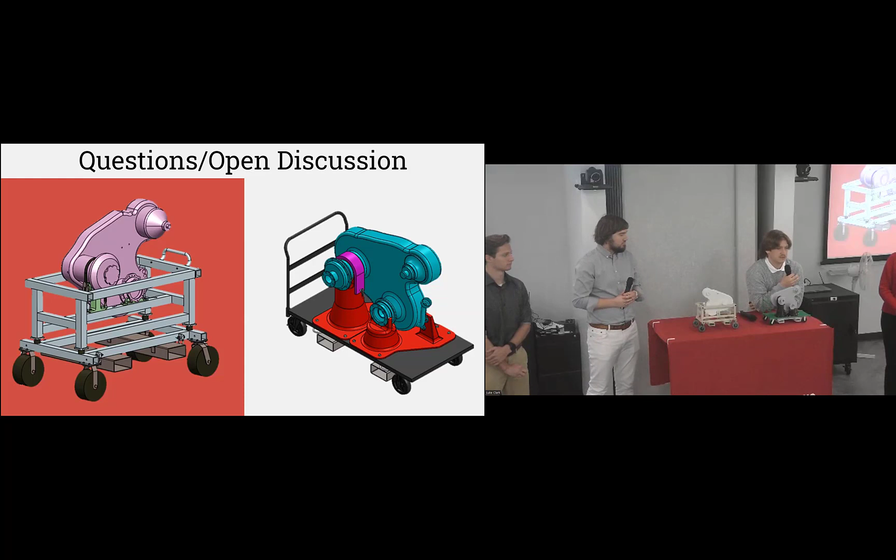Was there a specific load case, just the clamping, the compressive force? I was curious whether you had to consider oversizing for an insert to go in there, or if it's good. No, we talked about it, but as far as we did the calculations, we had high safety factors bolting straight through it: shear, compressibility, everything. So as far as the design is, as you see it, there are no inserts.

Did you have to calculate it against different fill forms, or did you just go with solid? Oh, you're talking about infill? So yeah, 3D printing takes a long time, so we explored different infill percentages, which is basically how much of the inside volume of the structure is actually 3D printed and how much is just empty space. It gets really difficult to actually calculate what a structure can withstand when it's partially infilled. It requires a lot of computer software.

So for this project, the inside is 100% infill. But if you did have an expert team in finite element analysis, they could optimize this and drive your price lower, your print time lower, et cetera, by making the inside a lot less plastic and more air. But everything here we calculated at 100% infill.

When the customer brought you a problem, did they know what they wanted or what the problem was, or how did you dig down to find the solution? So, I believe you were the customer. Great question. Like I talked about earlier, we wanted to get all perspectives. You as the FST gave us the engineering perspective. I believe you brought to us that maybe the shipping container is the answer. Looking into that more, we realized it's not always there, as was mentioned.

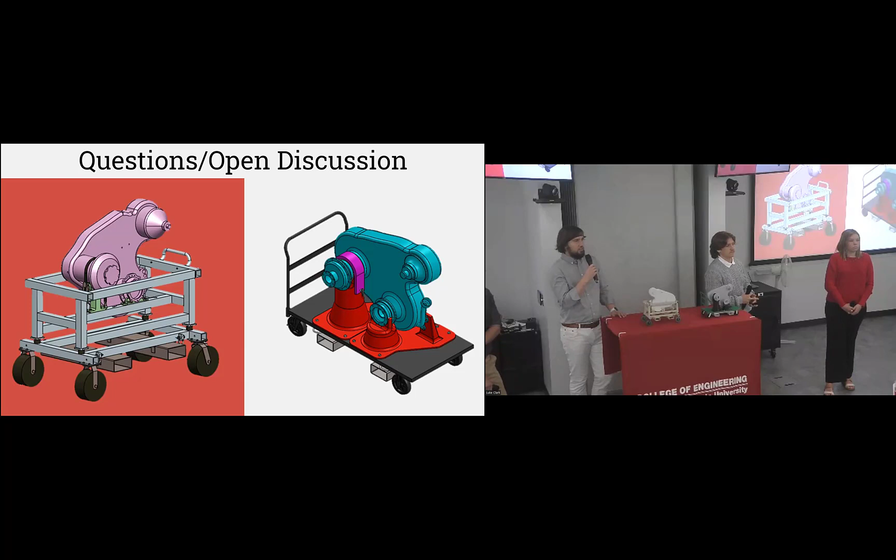So what was the plan, or at least the discussion, about validation of the design meeting, say, strength requirements? Is there testing that was considered that would be part of this design process? That was not part of the scope of our project. We were just to do the analysis and then provide the report of what analysis we did. And then if they wanted to build it and validate it, they would have to do that on their own. Good question. But normally, yes. Yeah.

Did you guys have an opportunity to actually show your designs to the folks that are physically doing this? We have not been able to do that now. Would be made if it's accepted. I think the ideal situation is that if they need one, they can just make it on the spot. So if they hear that something's going to be coming off this week, maybe by the time it's off, they already have a solution materialized within the facility itself. They never had to reach out. They just initiated the work order and then bam, it just comes right off onto the cart that they made themselves. So, on demand.

Is that 5 locations, 50 locations, like if you made them everywhere? I'm just curious the number. Scale. I don't know an exact scale. Do you know how many sites? Well, there's just one site currently at New River. This was a 53K. As far as permanent sites, you got New River, Miramar, Okinawa, Norfolk, and Byron. Potentially the TMI sites as well. So later in the aircraft's life, whenever it expands to all the other sites, there'll definitely be a lot more of these being made theoretically.

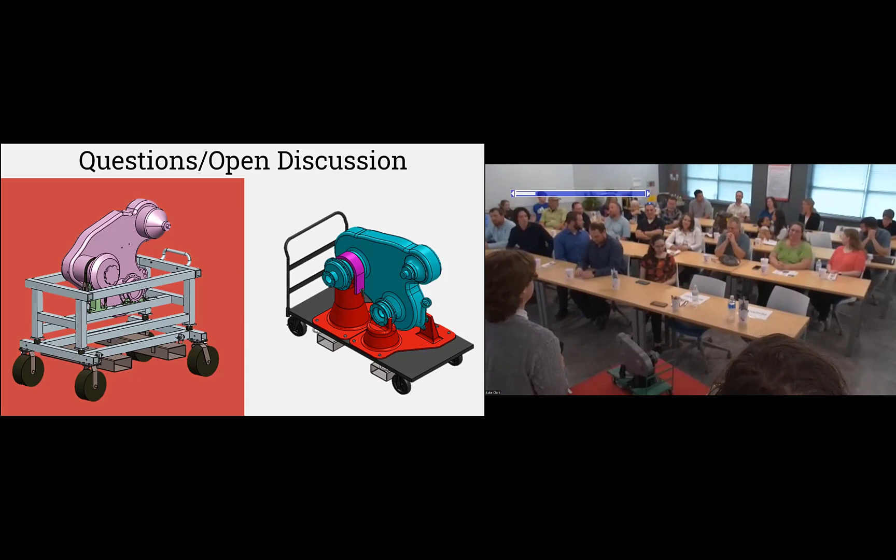But just because we only get to mentor you for a little bit longer, what Marissa touched on is super important, right? If you have a concept at concept time, and I know you guys were constrained in your ability to communicate with the end users, but in our environment, going out to the shop, to the guys that are going to build some things, guys that are going to use the thing, or girls, and just communicating your concept with them, that's going to make you a lot better engineer in terms of being useful to the end user, right? So don't ever forget that part. Obviously, you were limited in your ability to do it this time, but as soon as you have a picture you can put on a piece of paper, bring it out and talk to somebody about it. If you're needing to solve somebody's problem that's going to be hands-on with it, if you have that opportunity, take advantage of it.

Yeah. So I don't think it was iterated quite enough. We did go 2 or 3 times down to New River. And I remember, one of the later times I had my iPad with all of my hand sketches on it. And I was up on the aircraft talking to the guy, showing him if it made sense. And so we did go through it with him a little bit visually. But into the later stage of the project, it was crunch. It was definitely crunch, yeah. They'll come up with stuff that you never even thought of. Yep. You feel like a real idiot for not thinking of it, but they'll really help you out. Yeah. Thank you. For your PPE when you were up on the aircraft? Every single time.

Yeah, so what is the lowest level maintainer that could typically build one of these? I don't know if it was discussed in the final presentation between the two designs. That can build one or operate. They have the instructions to build one of these, so O&I, what's the depot level, what's the lowest level that can take these procedures and build them?

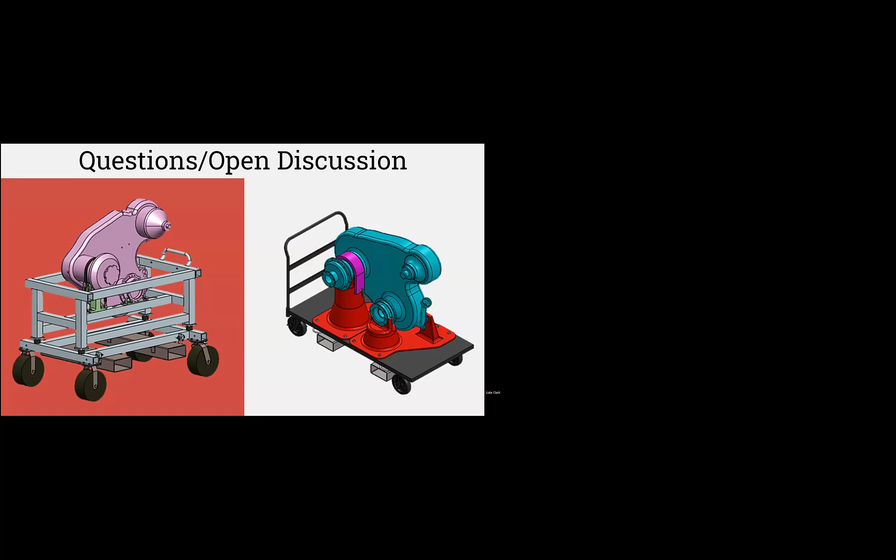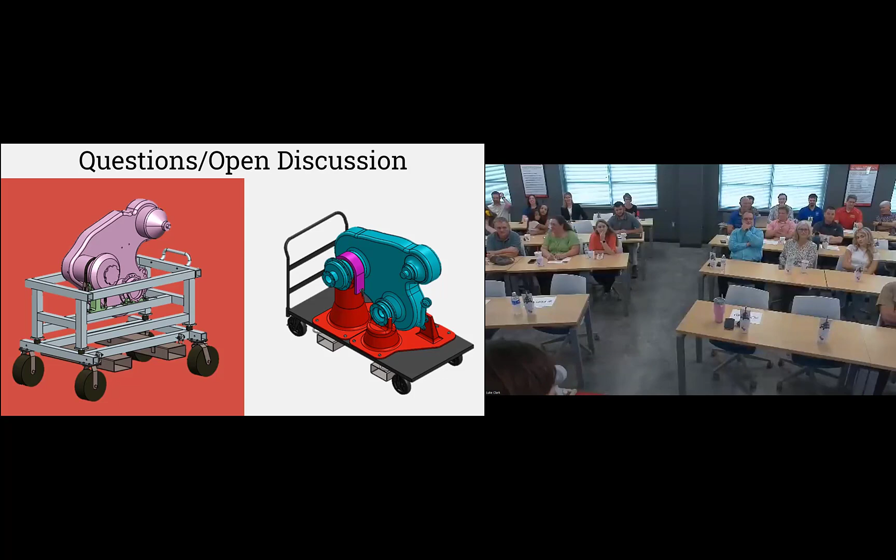Actually have a non-project question, if that's okay. Where's everyone headed after graduation? That's a great question. I guess we can let everyone say if you all want to stand up and we can just go down the line and tell where we're working after. Thane, do you want to start and then we'll go down that way? I currently am an intern on the H1 FST for structures. So I'll start there full time on the 20th of May. I am currently interning at Tandemloc Incorporated just down the street, and I'll be starting there as well. I have been interning with H53 Drives with my boss back there. So yeah, I would just be continuing full time on May 20th there. I will be starting on May 19th as a full-time engineer working with the MQ9 support equipment team, my lovely team down there.

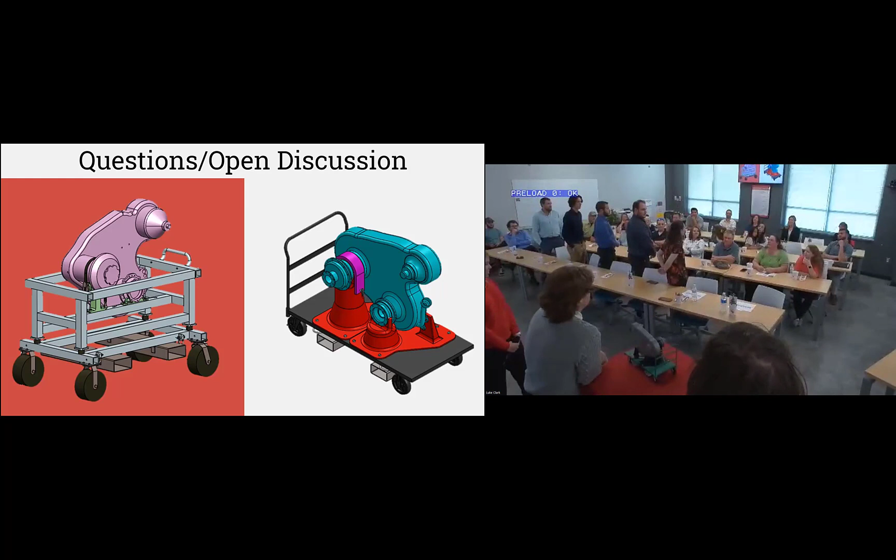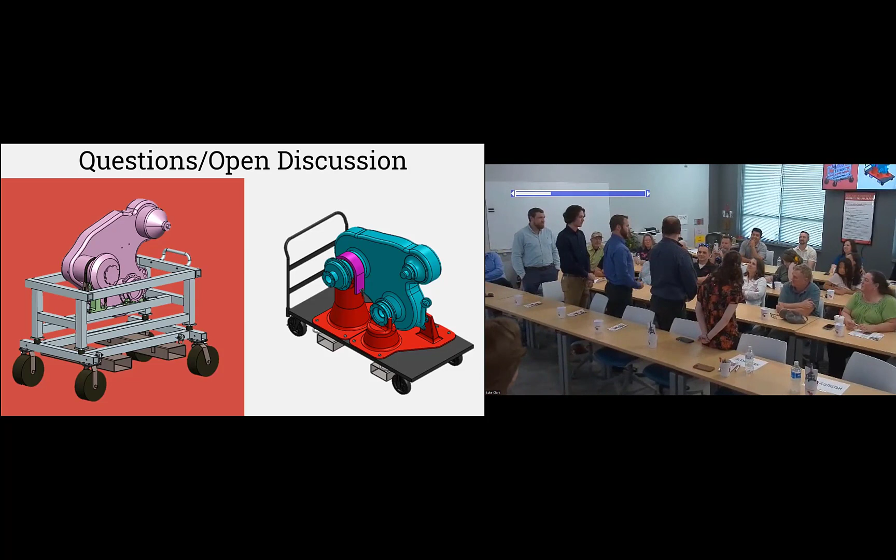I'm going to be over on FRC. I think I'm still going to be on the H53 team that I was with interning last summer. I'm the oddball in the group. I'm going to be moving up to Ohio. I'll be working with the company Ellwood Specialty. Why are you moving to Ohio? My fiance lives up there. And we're getting married in just over 3 weeks. So I'll be starting my job. So I currently intern at Tandemloc, and I'm gonna go full time in May. I'm currently interning with the H53 program on Cherry Point as well. I'll be working there full time in June. I've been interning with the H53 Drives team like Andrew with Troy. Been full-time throughout school and I'm just gonna continue full-time after this. It's been full-time.

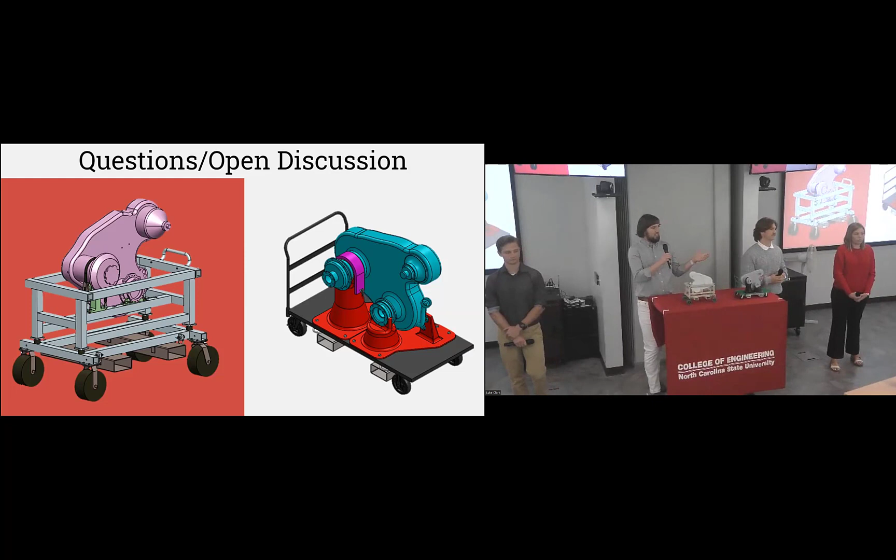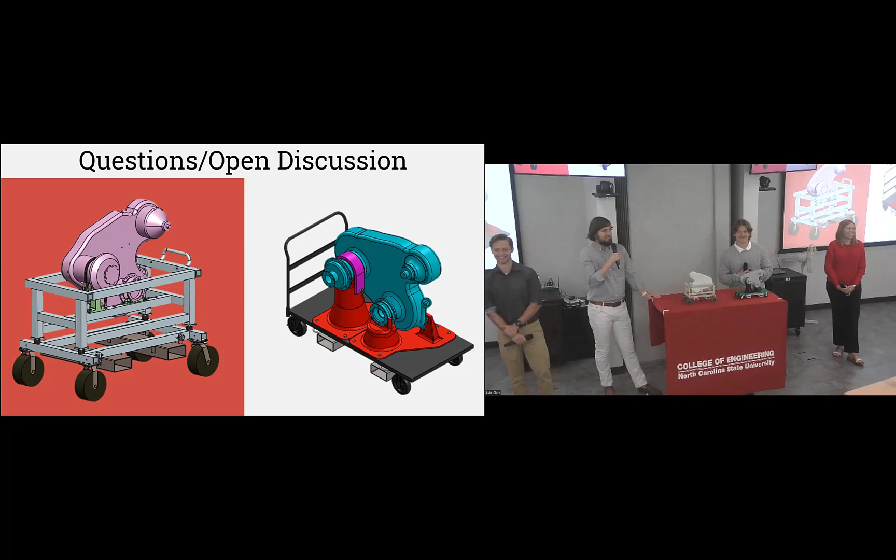Then we also wanted to thank the faculty here at the NC State program in Havelock, Dr. Fortney and Dr. Dave, who wasn't able to be here today, unfortunately. They were great instructors for this entire year. We want to thank Michelle as our great advisor and Miss Susan.